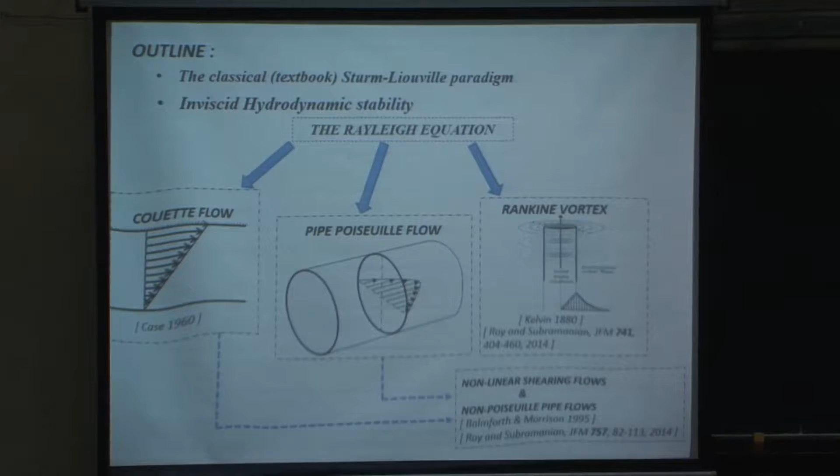What I'll be talking about is inviscid hydrodynamic stability, meaning that the viscosity is negligible, so the Reynolds number is infinity. We'll see that the governing differential equation for the modes of an inviscid fluid is the Rayleigh equation.

After looking at the Rayleigh equation, we will first analyze what the discrete spectrum of the Rayleigh equation is, meaning the modes of the Rayleigh equation that look like the modes of the classical paradigm. Then we will go to what is the continuous spectrum of the Rayleigh equation, because that is more important in some sense.

Because this is a pedagogical lecture, we will actually derive the form of the continuous spectrum in a couple of simple problems. So we look at the simplest case, Couette flow, and then we look at pipe flow, and we look at two-dimensional perturbations, which are simple enough that you can find the continuous spectrum. Then, depending on the time, we will go to problems of greater complexity.

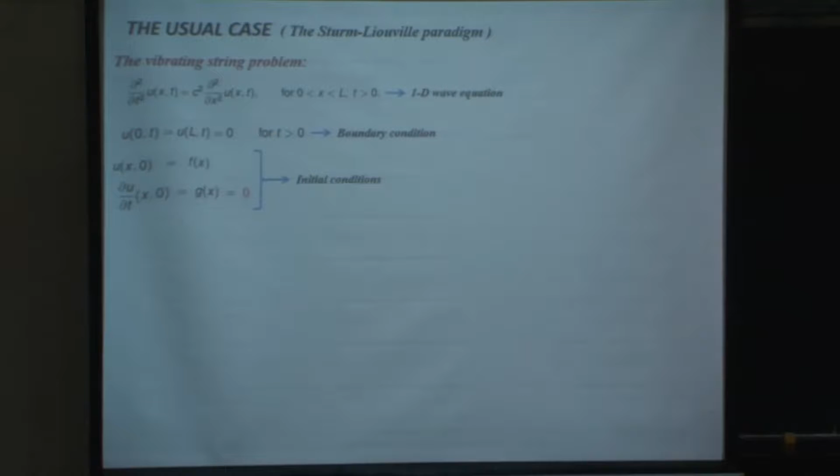Okay, so this is the vibrating string problem. U there is the amplitude of vibration, and U satisfies the wave equation. C is the wave speed, which is related to the tension in the string and its mass per unit length.

Right now what we care about is we have a differential PDE like this, with suitable boundary conditions. These are just fixed end boundary conditions, so the vertical displacement of the string is zero at the ends, fixed at the ends. We have certain initial conditions, which involve both specifying the displacement, how much I pull the string, and the velocity of the string at the initial instant. Knowing this, I have a well-posed problem.

So I'm going to look for normal modes of the vibrating string, meaning characteristic oscillations that preserve their shape even as they oscillate in time. These oscillations, though they are functions of both position x and time t, exhibit a separable dependence on x and t. So we write it as a function of x times a function of t, and this function of t is a complex exponential, denoting an oscillatory function of time. C lambda is the frequency, lambda here is like the wave number.

So if we just substitute this in this equation, we get a simple second order differential equation in x, and we get x to be sinusoids.

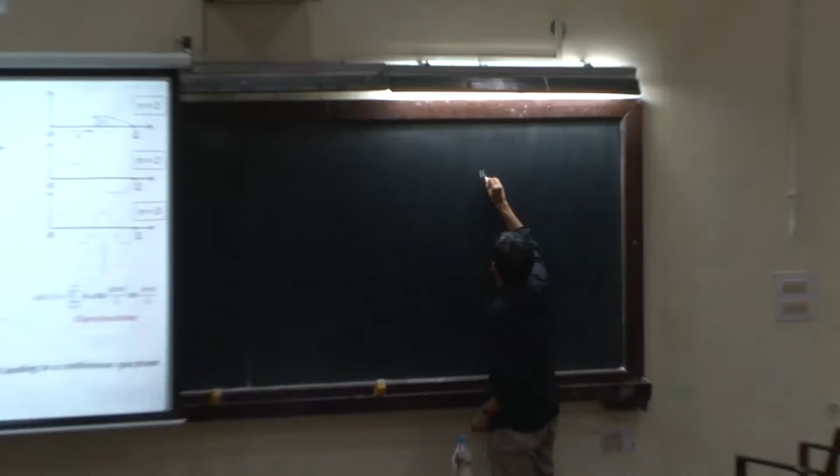Once I know the individual modal amplitudes, what I'm saying is I have an initial amplitude u of x, and I am going to write it in terms of this series. These are the unknowns, but knowing this function, this is just a Fourier sine series, those are the coefficients, so I can immediately invert it in terms of u naught and find out the a_n's.

Once I find all the a_n's for all n, then I know what is the projection of u naught on each of the elementary modes of vibration of the string. Once I know this, then I know the decomposition of the initial amplitude in terms of the elementary modes.

Then it's trivial to get u at any finite time, because all I have to do is oscillate each of these modes at that frequency. I immediately obtain the finite time solution from the initial disturbance.

So this is the advantage of knowing the modes: once you project an arbitrary initial disturbance in terms of the modes, you immediately know the solution for any time, because you know how each mode behaves for all times. So the idea is to try and do this in the context of hydrodynamic stability.

This is what is called a discrete spectrum, because as you can see, the eigenvalues are well separated, and they form a countably infinite set. We'll see that this is usually not the case in hydrodynamic stability.

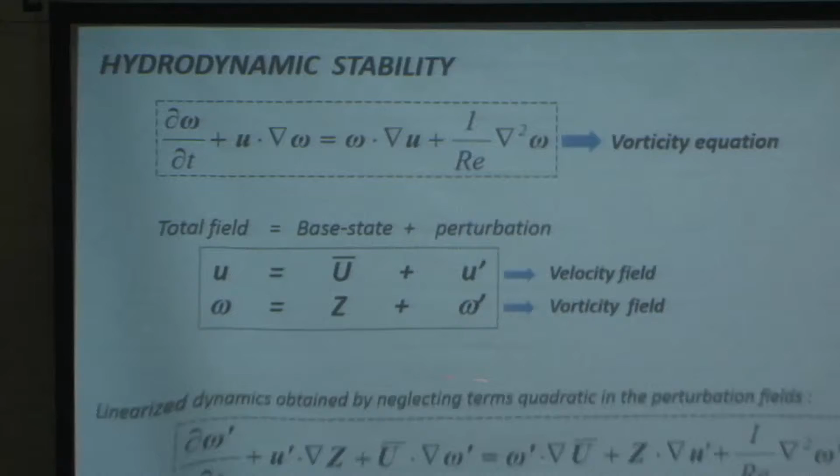Remember, we are dealing with inviscid stability. Inviscid stability corresponds to Reynolds going to infinity, so I will push out that diffusion term and only consider the inviscid vorticity dynamics. So that is the equation that is going to underlie all of what I say today.

Just to identify the different terms: this is the unsteady term, the variation of the perturbation vorticity field with time. This is the convection of the base state vorticity by the perturbation velocity field, and the opposite, convection of perturbation vorticity field by the base state. These are the two vortex stretching terms: the perturbation vorticity is stretched by the base state gradient, and the base state vorticity is stretched by the perturbation gradient.

So we are going to go in this sequence. We'll first consider planar shearing flows, with two examples: Couette flow, where u of y is just y, proportional to a linear profile, and if time permits, we will consider channel flow, where u of y is a quadratic function of y.

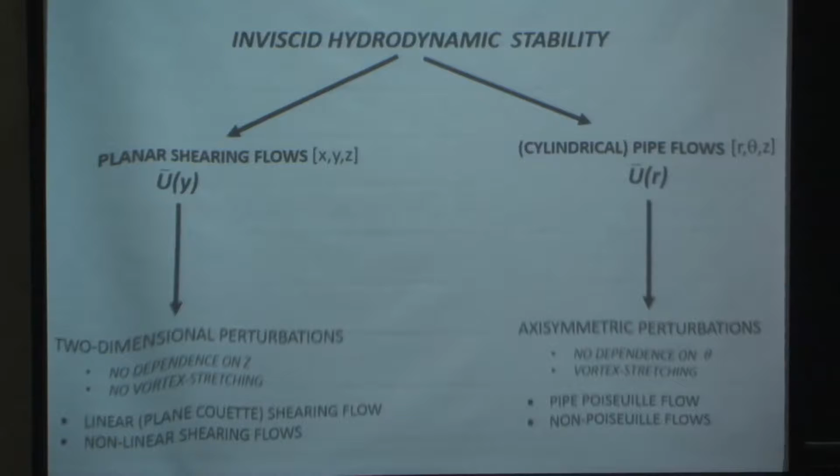We will start with two-dimensional perturbations. The advantage of two-dimensional perturbations is that there is no dependence on the third coordinate z. So x-y is the plane of the flow, u is in the x direction, y is perpendicular to the flow direction, and z is along the base state vorticity direction.

So two dimensions means that there is no dependence on z, and if there is no dependence on z, the vortex stretching terms in the equations I just showed would be identically zero. So it allows for a simpler equation.

But we will also consider pipe flows, and in pipe flows, the analog of two-dimensional perturbations are axisymmetric perturbations. Pipe flow is a cylindrical coordinate system. The flow is in the z direction. It varies as a function of the radial coordinate, and the analog of two-dimensionality is that there is no variation with theta, so it is axisymmetric. But the crucial difference is that while there is no vortex stretching in the planar shearing flow case, there will be vortex stretching here, and that leads to a crucial difference.

So I am going to go in this sequence. I will first consider linear planar shearing flow with two-dimensional perturbations. Then I will go to pipe Poiseuille flow with axisymmetric perturbations, and then come back to consider a nonlinear flow, and then go to non-Poiseuille flows depending on the time constraint. So that is roughly in increasing order of difficulty.

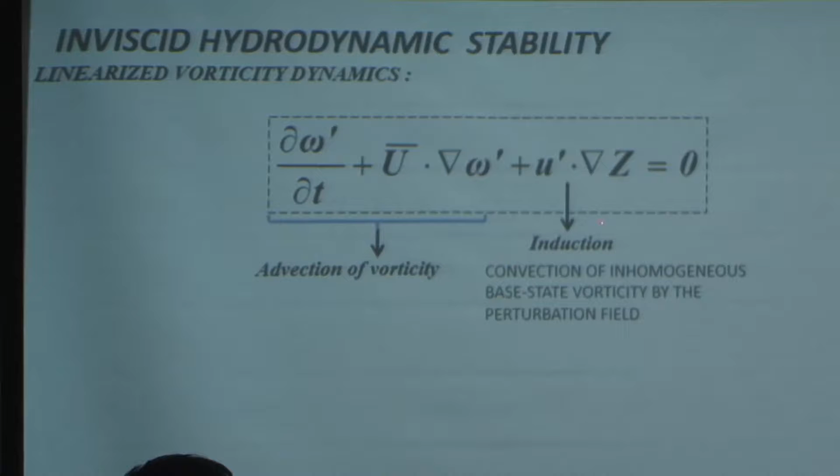So for two-dimensional flows, as I said, there is no vortex stretching, so there is only the unsteady term and the convection of the vorticity. This is the material derivative of the vorticity field, and this term arises because the base state vorticity is not constant. So this is convection of the inhomogeneous base state vorticity field by the perturbation velocity.

So what I do is similar to the string problem: I look for normal modes. Remember, there we again had a complex exponential. So we are going to do the same thing, expand both the vorticity field. The vorticity field now has only one component since it is a two-dimensional perturbation. A two-dimensional flow only has a vorticity pointing out of the plane, so that is the only component of vorticity.

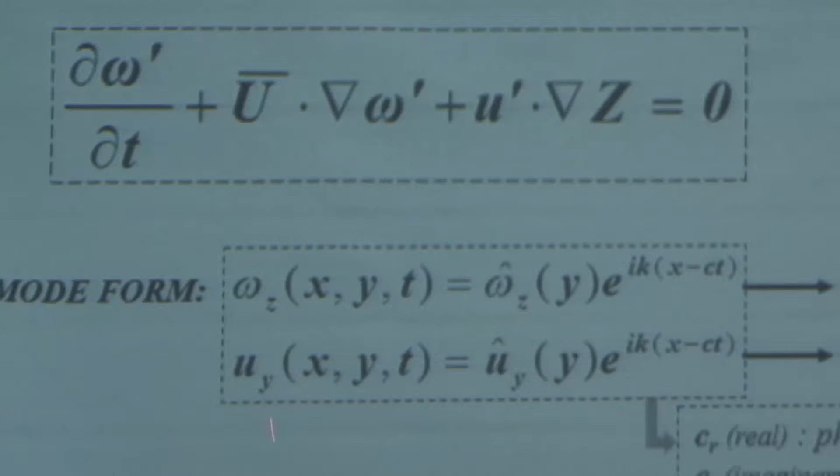So I am going to expand it as a wave. This wave propagates in the x direction with speed c, and the wave number is k, so this dependence on y has to be found. Now similarly, I expand the normal velocity in the perpendicular direction, that is y. There will be a corresponding velocity in the x direction that can be derived from the continuity equation.

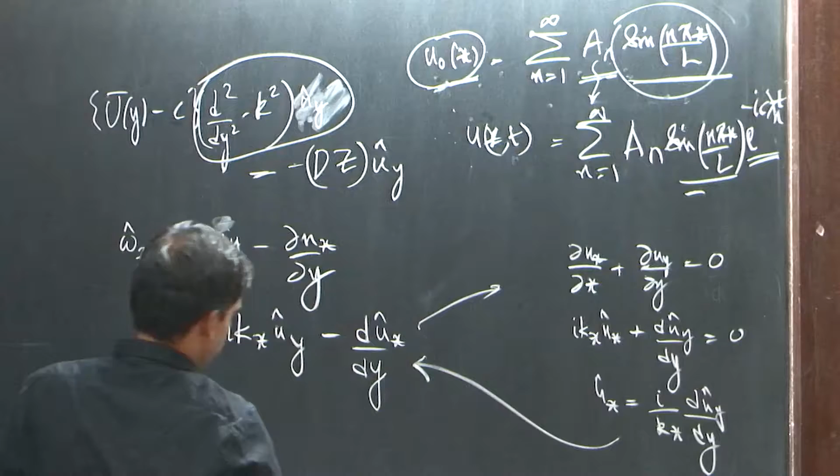So that operator is proportional to the vorticity, and it's easy to see that because you start from the definition of vorticity, and because you have assumed wave-like perturbations, it's going to be proportional to Ikx. Then you use the continuity equation to get Ux, and you substitute it here so that you get Ikx, and you find that omega z is proportional to that quantity.

So there is the perturbation velocity vorticity, that is the wave speed, that constitutes the unsteady term. That's the convection of the base state vorticity by the flow, known as the induction term. Remember, the induction term is the convection of the base state vorticity by the perturbation velocity field, and the base state vorticity is in general not constant. Z is the base state vorticity, and dz is the gradient of the base state vorticity with y. It exists because the normal velocity convects more vorticity into a given region and less vorticity out of it, and that leads to this source term.

So then this is the eigenvalue problem to be solved. The eigenvalue problem is in the normal velocity. We have a second order differential equation here, and we have boundary conditions — we can take the boundaries at y equals 0 and y equals 1, where uy will be 0. So we have to solve this and get the characteristic eigenvalues, which are the values of c. Once we know uy, the vorticity field can always be obtained from this.

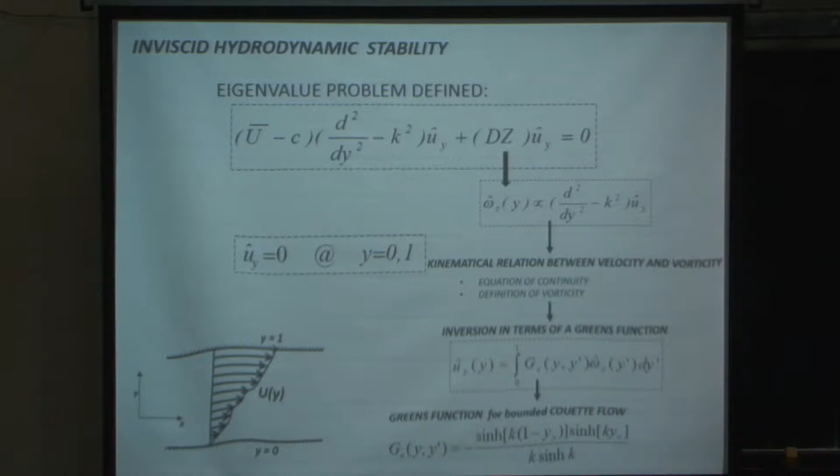Okay, so now first we look at simple cases. The simple cases are where the Rayleigh equation has a discrete spectrum. So we'll first look at the discrete spectrum of the Rayleigh equation and see the difference between the discrete spectrum of the Rayleigh equation and the discrete spectrum for the vibrating string.

So in order to see the discrete spectrum, we will consider the simplest instability problem of a homogeneous incompressible fluid, known as the Kelvin-Helmholtz instability. The instability is that of a vortex sheet. You have a sheet and the vorticity is only non-zero on this sheet, so you can imagine this sheet being threaded by vortex lines. We will analyze the instability of this vortex sheet to perturbations, imagining this sheet to be slightly disturbed and seeing how that disturbance amplitude evolves.

Now the first question to ask is, what does the base state vorticity profile look like? Well, the base state vorticity is only non-zero at this y location. It's zero everywhere else, so the vorticity is actually a delta function.

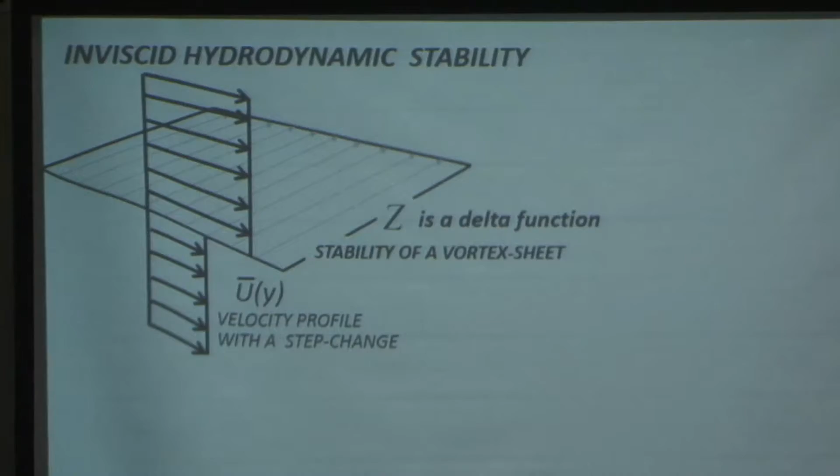What is the velocity that it induces? It induces a discontinuous velocity field with a step jump, and that is because each of these vortex lines wants to induce a circulation like this. If I look at the sheet along that direction, the vortex lines are all pointing towards me. These are the vortex lines making up the infinite sheet, so it goes on to infinity in both directions. Each vortex line induces a circulation like this, okay?

And when you add up all these circulations, you can see that the fluid will be moving in that direction above and in the opposite direction below. So if you add a uniform velocity to this, that will give you a stepped velocity profile. So that's the base state profile that we are analyzing the stability of.

Yeah, I have just reversed it for convenience.

Okay, so now we perturb the vortex sheet and analyze the instability. Now this instability can be easily seen physically.

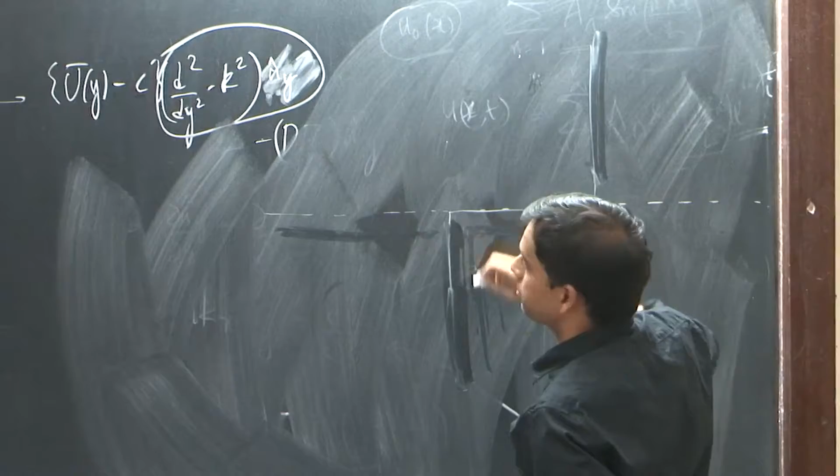So we had the initial plane vortex sheet here, and remember the velocity field it induced was this. I'm just going to take it the other way, because it's like that in the slide, so I'll just reverse it. So this is the base state velocity profile.

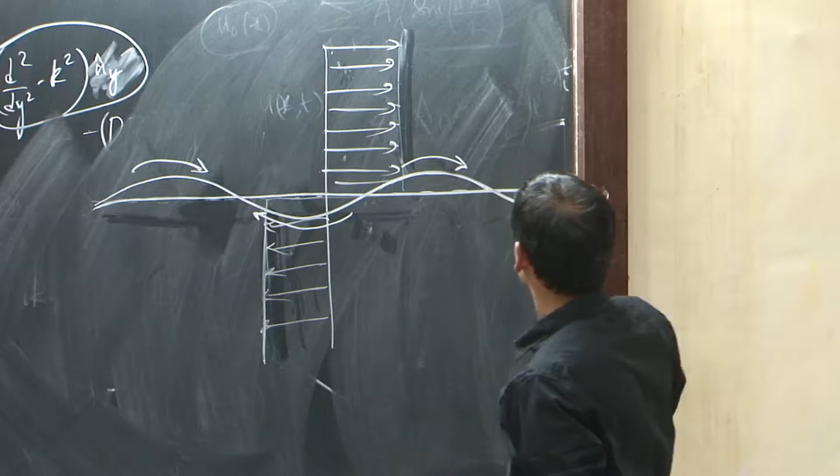This was the original plane vortex sheet, and now I imagine I introduce a modulation, so it becomes a wavy vortex sheet. So now what happens? Well, if I imagine this part of the vortex sheet is now subjected to this flow, whatever parts of the vortex sheet are going to be in the upper half are going to be convected by that flow towards the right.

The deformed parts which are in the lower half are going to be convected towards the left. And now remember, since I changed the sign of the vorticity, the vortex lines are now pointing inward, so I'm going to denote them as crosses. These were the original vortex lines that were threading the vortex sheet. And now I have these crosses moving towards this point, these crosses moving towards this point, so I have an excess cross vorticity there.

And that excess cross vorticity is going to induce a circulation like that. And I'm going to have a deficit cross vorticity here, which is going to lead, because the vorticity is moving away from there, to negative perturbation vorticity. That's going to lead to the opposite circulation.

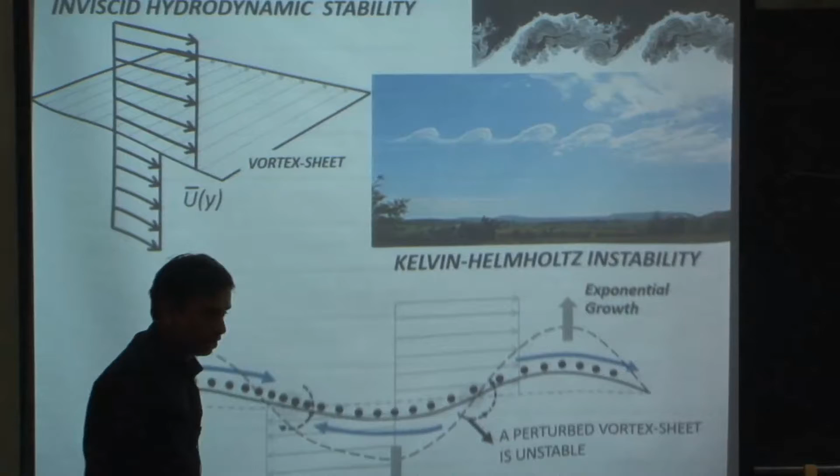So you can see that the induced velocity field due to the deformed vortex sheet pushes this part up, that part down, and again it pushes this part up. So a wavy perturbation tends to amplify. The vorticities tend to concentrate and rarefy at alternate nodes, and that tends to amplify the vortex sheet. So this is really what's known as the Kelvin-Helmholtz instability.

So there I've shown the vortex sheet amplifying with time. Now if you ask what is the growth rate of this vortex sheet, let's go back to the form of the normal modes. So C when real is a wave speed, and the imaginary part of C is the growth rate.

So now if we ask what rate does the vortex sheet grow, you can see that the velocity field induced is symmetric. So we expect the vortex sheet to remain stationary but grow. So the wave speed is zero and there will be a growth rate, so C will be purely imaginary. Now C has units of a velocity.

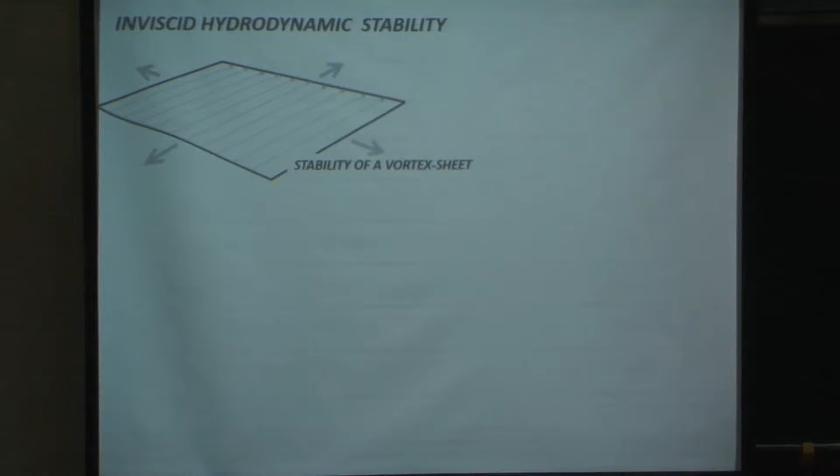Dimensionally, if we look at what physical parameters we can use to form C, there is no length scale in the problem. The vortex sheet has zero thickness, so the only parameter is the velocity of the base state. Therefore Ci has to be proportional to u. It turns out the constant of proportionality is half, but even without that, you could say Ci must be u, because there's simply no other dimensional quantity to make a dimensionless function.

Now if Ci is u, then the actual growth rate is u times k, where k is the wave number, the inverse of the wavelength. This tells you that the growth rate becomes stronger and stronger as the perturbations have smaller and smaller wavelength.

That's because the growth occurs due to convection of vorticity over a distance of a wavelength. With a smaller wavelength, it takes a shorter time for the flow to convect and for the vortex sheet to grow. So in this approximation, the smallest wavelengths grow most rapidly. If I plot Ci versus k, the wave number, this is a plot of the dispersion relation.

Then I have the growing mode, which is just half u. Growing and decaying modes in the Rayleigh equation always occur in pairs, so for every growing mode there will be a decaying mode, at minus half. Remember, they are independent of k, so they are just horizontal lines.

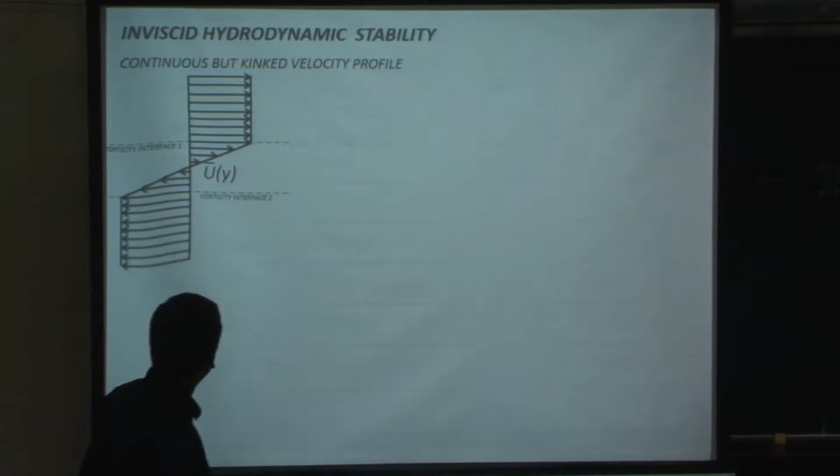Now we'll smoothen the velocity field a little bit. We had a jump in the velocity field, now we'll make it continuous. Originally our vorticity field was a delta function; now the vorticity is zero here because the velocity is constant, and constant there too. So we've regularized it from a delta function to a step function. The vorticity field corresponding to this velocity profile looks like a plateau of vorticity in a region of height h.

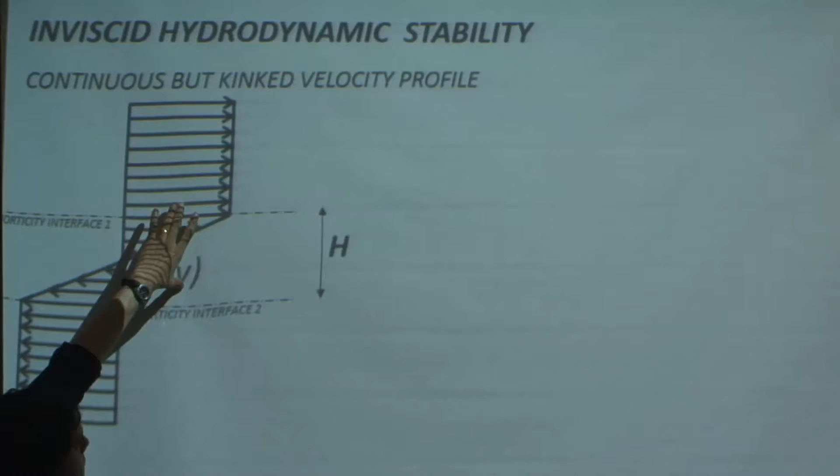The important thing we've attained by regularizing this velocity field is that we've introduced a length scale into the problem, the length scale over which the velocity varies from u to minus u. You can already see that for sufficiently large wavelength perturbations, much larger than h, this length scale is negligible, and things will reduce to the earlier problem. For large wavelength perturbations, corresponding to very small k, we still have the original problem, but here we have a non-trivial relation.

Going back a couple of slides, earlier we could say Ci is proportional to u because there weren't enough parameters to form another dimensionless function. But now that we've introduced a length scale h, k times h is a dimensionless wave number, so f of kh is a dimensionless function. Since u has the dimensions of velocity, C must be proportional to u times this dimensionless function, which we get only by solving the Rayleigh equation. We expect, because long wavelength perturbations much greater than h would still behave the same way, that f of kh approaches half when kh goes to zero.

Now we won't solve this in detail because it's easy to see what happens. You have to imagine a non-zero vorticity portion here, with zero vorticity on either side. So we can regard the base state velocity profile as consisting of two vorticity interfaces: the first between a region of non-zero vorticity and a region of zero vorticity, and the second between non-zero and zero vorticity regions again. This means there are now two degrees of freedom, whereas earlier we had just one, the vortex sheet. Now there are two interfaces that can in principle behave independently.

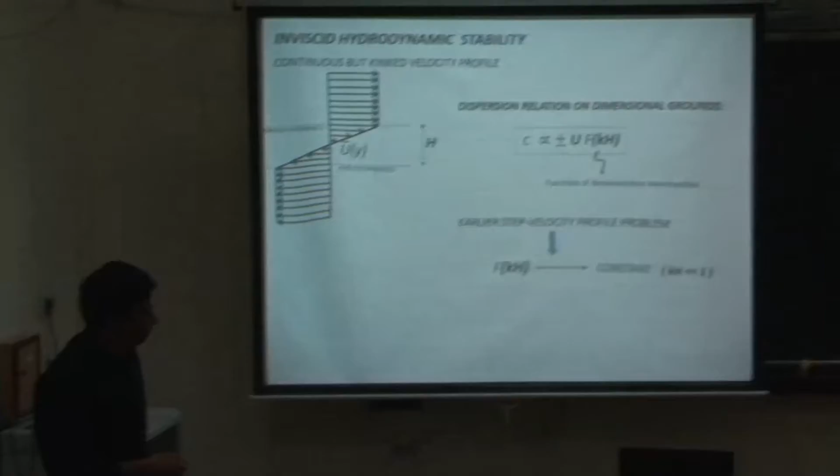So what we could do first is consider just one of these vorticity interfaces. What happens if I perturb one of them? This is what it looks like, a perturbed vorticity interface. The signs here denote the signs of the perturbation vorticity. How do I get the signs? Remember, the vorticity here is negative.

So this is a negative vorticity region. Whenever the interface dips into the negative vorticity region, it brings in zero vorticity, creating a positive perturbation vorticity that's greater than the original negative value. Conversely, if the interface moves above, it introduces negative vorticity from this region on top of the interface, giving negative perturbation vorticity, then positive, negative, positive, and so on.

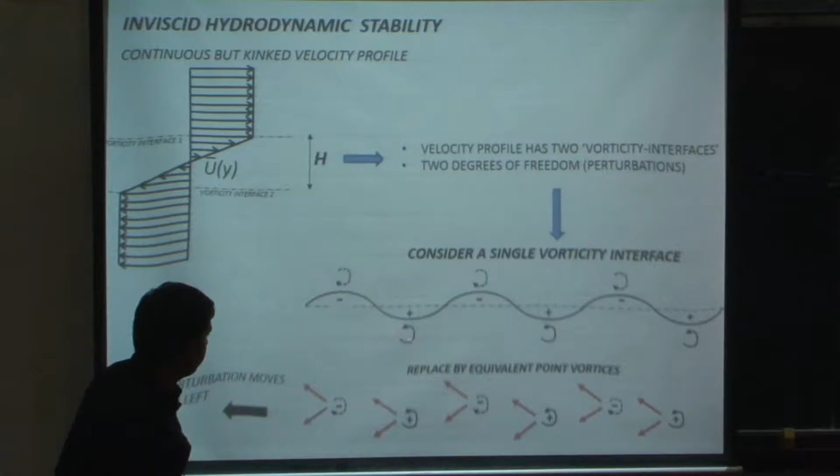Now that I've marked the signs of these vortices, I can simplistically imagine each as an isolated point vortex. Negative vorticity implies clockwise circulation, positive implies anti-clockwise. So I can replace this by the sense of their circulation, inducing clockwise, anti-clockwise, clockwise, anti-clockwise patterns.

Each vortex will convect with the sum of the velocities induced by all the other vortices. Let me draw this: negative, positive. Looking at the velocity induced by this vortex, its circulatory motion will push it in this direction. The circulatory motion due to the next vortex will push it in that direction. Similarly, this will push it by a smaller amount in this direction, and that will push it in this direction.

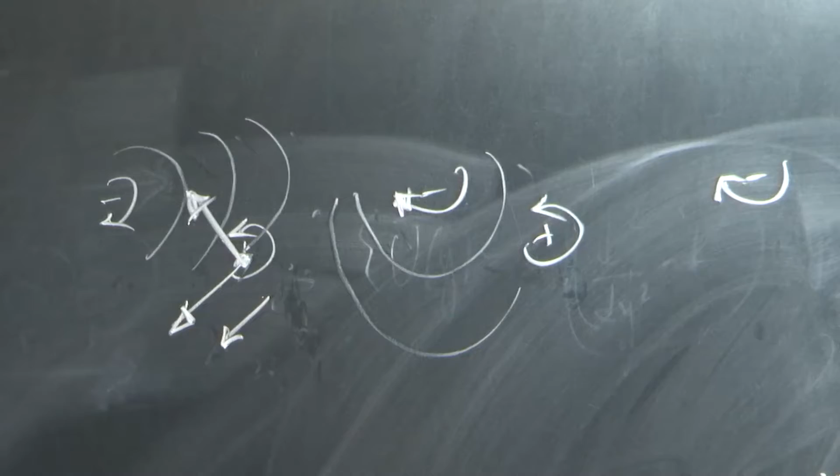You can see that the alternating signs are convecting it such that the convection in the vertical direction cancels, but there's a net convection in the horizontal direction. Therefore, that system of point vortices will actually move towards the left, which tells you that perturbed vorticity interface, if it were by itself, will move towards the left. By the same argument, the other vorticity interface will move towards the right.

So what does this tell us? We can consider the limit where those vorticity interfaces do not interact with each other, and that limit is where kh is much greater than 1. What does that limit mean? This means k is much larger than 1 over h, so that the wavelength of that perturbation is much smaller than the distance between the two interfaces.

The influence of this waviness extends to a distance of order one wavelength. This wavy perturbation induces a velocity field that decays over a distance of order one wavelength, and if the distance between the two interfaces is much greater than a wavelength, the two interfaces don't see each other—they behave independently, and each one is a neutrally stable mode. One propagates towards the left, the other towards the right. So we have two neutral propagating modes when kh is much greater than 1.

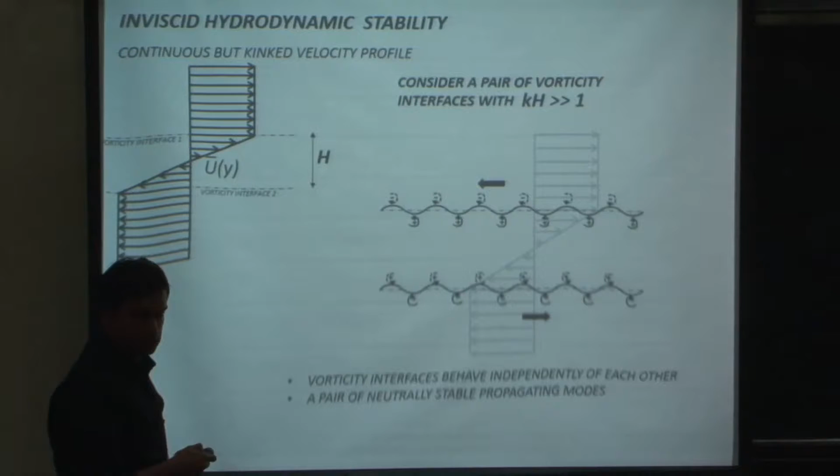But there are two things that happen when kh starts decreasing. One is that these interfaces actually propagate slower. The other thing, which you would have guessed, is that their range of influence extends. As they become longer wavelength, their velocity field influence increases, and the two vorticity interfaces become increasingly coupled.

At a certain point, they become coupled strongly enough that there's a resonant interaction between these two vorticity interfaces, and that's when the growth begins. So there will be a critical value of kh, an order-1 dimensionless number, below which longer wavelength vorticity interface perturbations will grow exponentially. And when the wavelength becomes very, very long, it reduces to our earlier Kelvin-Helmholtz problem.

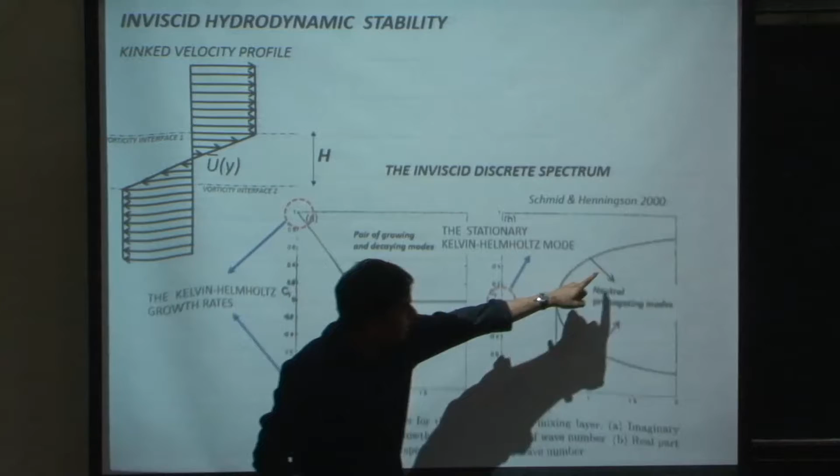If you look at the spectrum, it looks this way. Here I have two things: the imaginary part of c, which is the growth rate, and the real part of c, which is the wave speed, both plotted against kh. At very large kh, the growth rate is identically zero—remember, these were neutrally propagating modes. We have a pair of wave speeds, one propagating towards the left, the other towards the right.

As kh decreases, they become strongly coupled and propagate at the same speed, which by symmetry is zero, because the velocity profile points towards the right and towards the left with the same magnitude. Below a certain kh, it's zero, and the growth rate takes off, asymptoting to a finite value as the wavelength becomes infinite.

So in the limit kh goes to 0, you have a very long wavelength instability, which is in fact the same growth rate that we found in the first problem. That growth rate is plus or minus u by 2 — the Kelvin-Helmholtz growth rate.

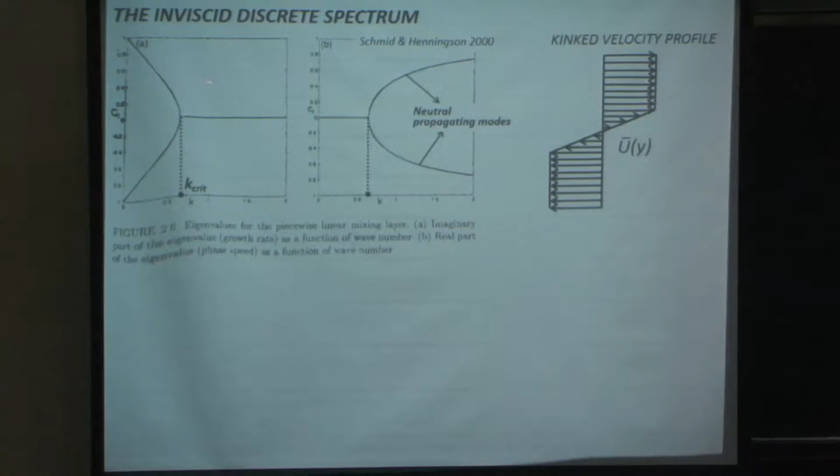Okay, one more step. So this is the spectrum. Our velocity profile is still artificial in that it has a kink there — a jump in slope. So for this kinked velocity profile, we just saw the spectrum.

Long wavelength growth rate and short wavelength neutral propagating modes. Now the question is, what happens when I smooth out these kinks, converting them into regions of sharp curvature? It turns out I retain the growing and decaying modes, but the neutrally propagating mode disappears. So the spectrum for a perfectly smooth velocity profile looks like that.

This is important because the spectrum tells us that beyond this critical wave number, there are no modes. And below that critical wave number, there is a pair of modes. Those modes have to do with the maximum in vorticity.

Remember, this piecewise linear velocity profile corresponds to a step function in the vorticity. If I smoothen that velocity profile, it leads to a Gaussian-like profile in the vorticity — a smooth maximum in the vorticity.

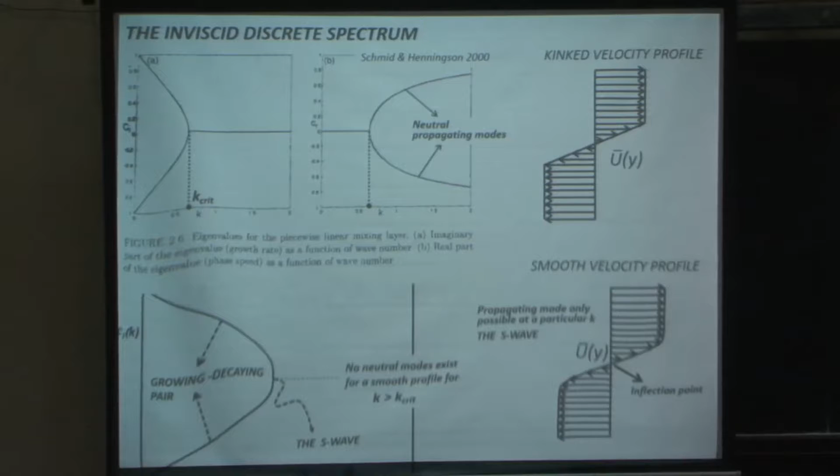So the two modes we are seeing here, the growing and decaying, are associated with that vorticity maximum. And the vorticity maximum leads to an inflection point in the velocity profile. So you need an inflection point corresponding to a vorticity maximum in order to see an instability. But the important thing is that, again, beyond a critical wave number, or below a certain wavelength, there are no modes.

So in general, the discrete spectrum of the Rayleigh equation looks like this. If we have a velocity profile with multiple inflection points, corresponding to each inflection point there arises a pair of modes as the wave number decreases, as we go to longer and longer wavelengths. But there will always be an infinite wave number range over which there are simply no modes.

So here, for instance, depending on the wave number I look at — if I look at this particular wave number, there are two discrete modes. If I look at this wave number, there are 1, 2, 3, 4 discrete modes. Of course, at wave number 0, this is for a velocity profile with inflection points.

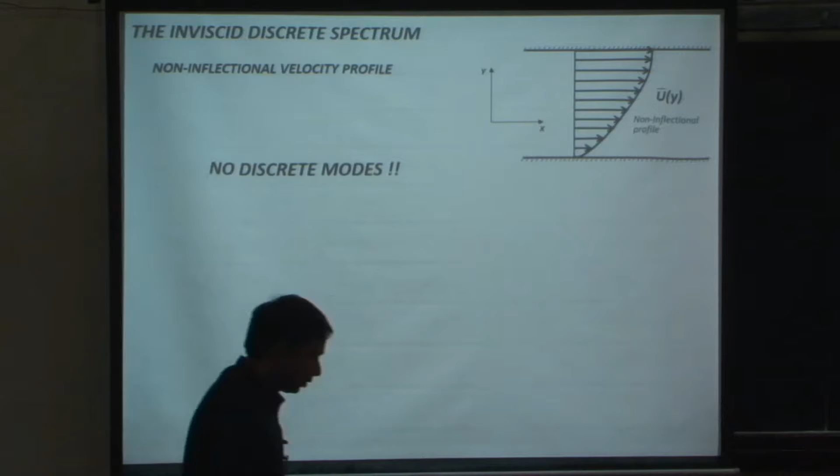If I have a non-inflectional velocity profile — channel flow, Poiseuille flow being an example — there are no discrete modes. And so there are profound differences from the case of the vibrating string.

So this is just summarizing it. For an inflectional velocity profile, we have a finite number of discrete modes which generally occur in pairs. For a non-inflectional velocity profile, there are no discrete modes. Now remember, for the vibrating string, we had an infinite number of discrete modes, and of course you need an infinite number to reproduce an arbitrary initial condition.

So the question here is, if we only have a finite number or none at all, if we start with a particular initial condition, how do we evolve it? What are the basis modes, or fundamental oscillations, fundamental vorticity fields, for this inviscid fluid? That's the problem.

So it turns out, in an obvious manner because they are finite or zero, that the discrete spectrum of the Rayleigh equation is incomplete, and therefore you need something called the continuous spectrum. The continuous spectrum, by its nature, tells you that the eigenvalues are not well separated — they form a continuous interval. All points in a continuous interval are all eigenvalues. And we will see examples of that.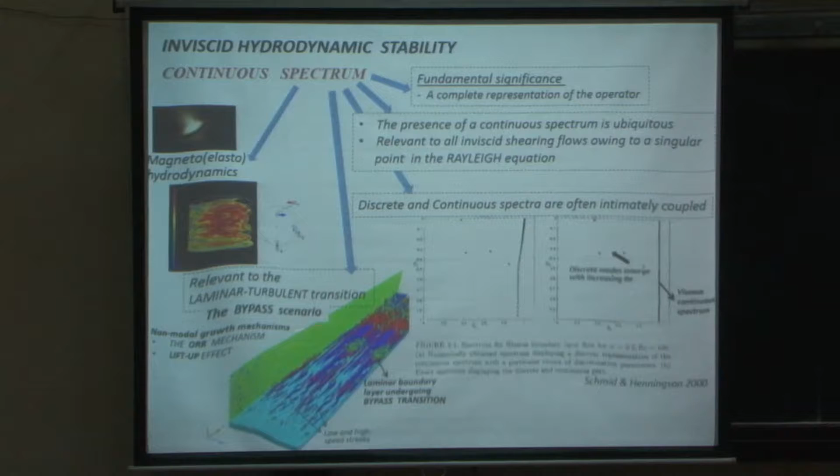It's also relevant to the laminar turbulent transition. There is a so-called bypass scenario where you have a free stream with sufficiently large disturbances. For a free stream with sufficiently high level of disturbance, the transition to turbulence doesn't occur via the conventional linear stability scenario, which involves a Tollmien-Schlichting instability. It occurs via a so-called bypass scenario, which involves the continuous spectrum eigenfunctions.

This is from the Orr-Sommerfeld equation. Yeah, so that is the viscous continuous spectrum.

So a more mundane reason for worrying about the continuous spectrum is that if you use a spectral code, an inviscid spectral code, and solve for any velocity profile, the spectral code spits out all the eigenvalues, and you get patterns like this. This is courtesy of Schmid and Henningson's work. And so the theoretical spectrum looks like this straight line.

Ci here is the imaginary part of the growth rate. You can see that Ci is identically 0. So the actual spectrum is neutrally stable. It's a neutrally stable continuous spectrum.

But because there is a continuous spectrum and the eigenfunctions, as we'll see, are very irregular, the numerics usually isn't able to resolve it. So it gives you spurious growing and decaying modes. In order to understand the structure of these growing and decaying modes, to know that they are spurious and related to an underlying continuous spectrum, you need to really understand the structure of the continuous spectrum to be able to interpret the results of a spectral code.

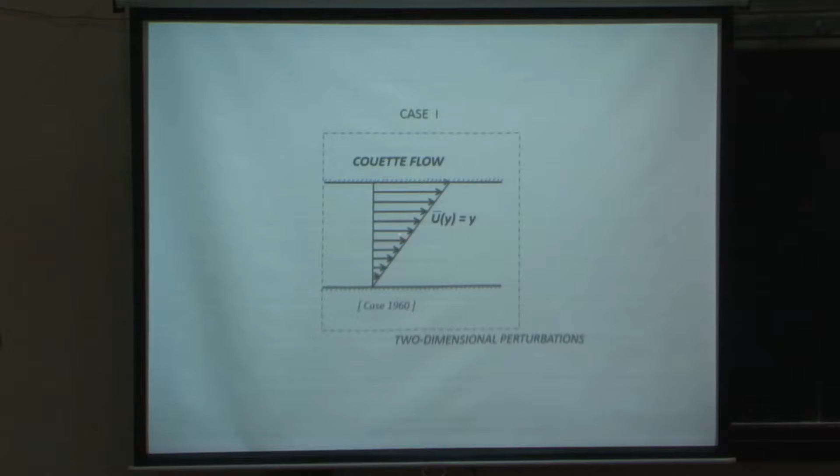So now we come to the simplest case of the continuous spectrum. We'll consider just plain Couette flow, where u is just proportional to y. We have a linear velocity field, and we'll consider two-dimensional perturbations. In this case, remember, there is no inflection point.

So there are no discrete modes in Couette flow. The spectrum is purely continuous. So we'll try to get that continuous spectrum. And what we'll next do is: obtaining the continuous spectrum will allow us to represent an arbitrary initial condition in terms of the continuous spectrum eigenfunctions, and therefore to see the evolution of that initial condition with time. So that's what we'll do.

So in this case, the Rayleigh equation is very simple. Remember, there was an additional term here proportional to u double prime. I think I rubbed it off, but the original Rayleigh equation looked like this. u double prime is of course identically 0 for Couette flow, and therefore we have a simple second order differential operator here.

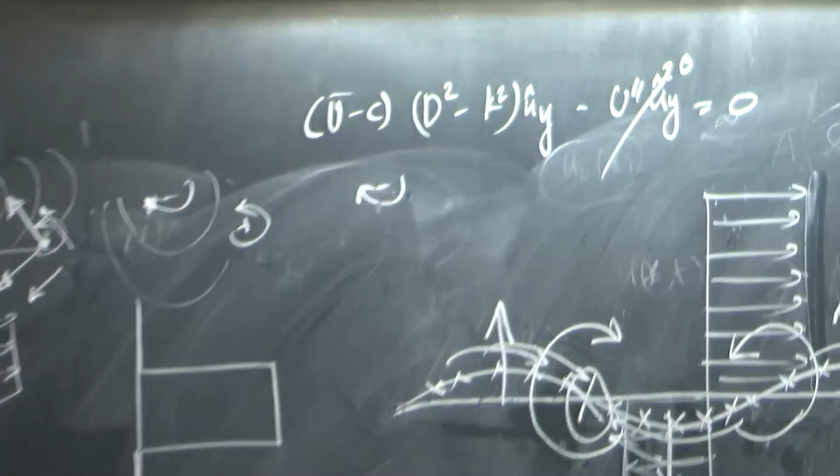We have the usual impenetrability boundary condition. Remember, it's inviscid, so I can only set the normal velocity to 0. I don't have the no-slip boundary condition. This is simple to solve.

If I equate this operator to 0, I get uy as just a combination of exponentials. And if I try to satisfy the boundary condition at y equals 0, I'll have a negative sign. So C1 must be minus C2. And so satisfying one boundary condition will tell me that uy is...

It's proportional to sinh, so that when y is 0, uy is 0. But when y is 1, sinh of k is not 0. And there is no combination of those constants that can make that 0, which is another way of saying that there are no discrete modes in this flow.

And this is not only true for Couette flow, it's true for any profile that doesn't contain an inflection point. So now what do we do? Where do we get the missing modes from?

To see that, we will again note that, remember, the spanwise vorticity was related to this second order operator acting on the normal velocity field. So if I look at the equation, this is really u minus c times omega z equals 0. And u is just y, so I'm going to write y minus c times omega z equals 0.

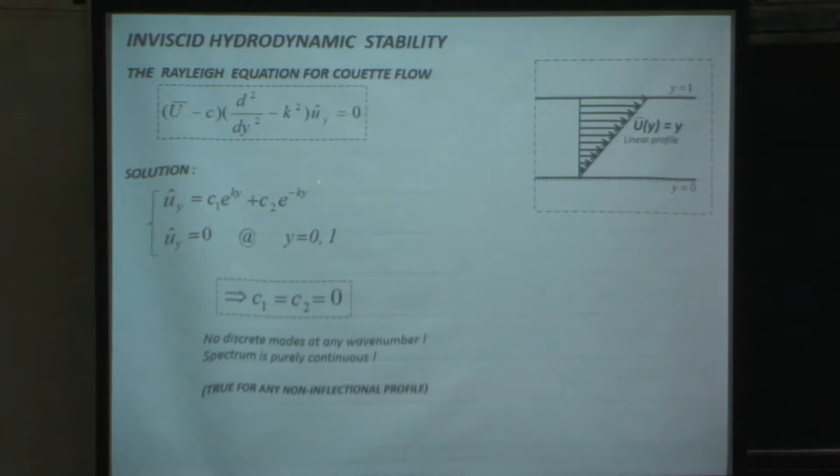Now there are two possibilities here. The first one, which is obvious, is that omega z is itself 0 — which is what I did here. I equated this operator alone to 0 and then landed up with no modes. So this option tells me that there are no discrete spectrum modes.

But there is another solution to this equation, and that is that omega z must be a delta function. This relies on the identity that x times delta of x, where delta is the Dirac delta function, is actually 0.

So if you have an equation like x to the power n times f of x equals zero, then f of x is actually a1 delta of x plus so on, up to an delta of the n minus 1th derivative of x. So the general solution of that equation is the linear combination of the delta function up to the n minus 1th derivative. In this case we have n being 1, so f of x can just be delta of x.

Now what does delta of x mean? Well, we saw it in the first problem. Remember, in the Kelvin-Helmholtz problem, the base state vorticity was a delta function. That was the vortex sheet. So here we are finding that the perturbation vorticity is a delta function, which means that the perturbation vorticity eigenfunctions must be vortex sheets.

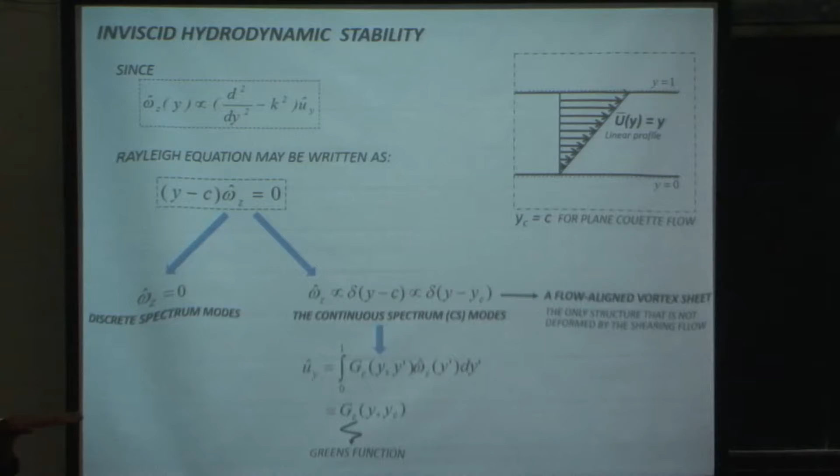There is a difference, of course, in that the vortex sheet in the Kelvin-Helmholtz instability had a constant strength everywhere. But this is a wave-like perturbation, so the strength of the vortex sheet must oscillate along the flow direction. Let's just draw the vortex sheets in the two cases.

So that was the base state vortex sheet which we started out from. This has everywhere the vortex lines with the same sense of rotation. This doesn't vary in x, remember this is the x direction. But now I have a vortex sheet.

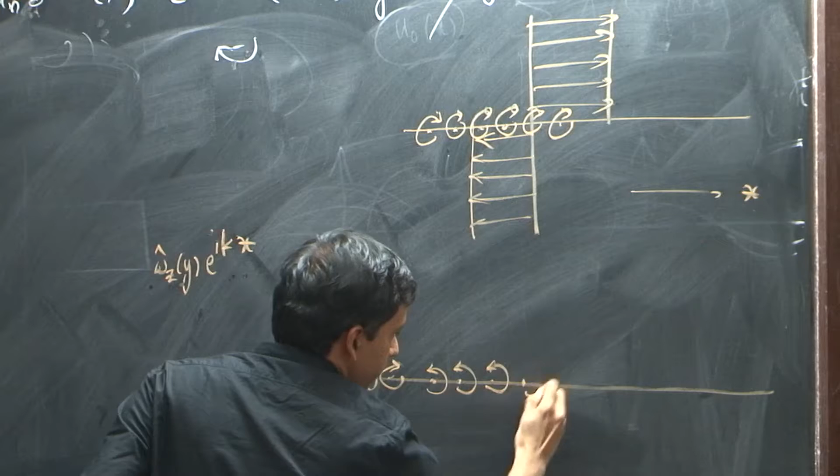Remember that the perturbation vorticity field is omega z of y times e raised to ikx, which means that the strength of the vorticity will change sign after every wavelength. So I'll have vortex lines here acting to turn it this way. If I go one wavelength away, they'll act to turn it the opposite way, and then again turn it that way. So I must have a discontinuity like that here, like this here, and then again like that here.

But of course I can't have these flows coming in like that. They have to go up, and these flows have to come down. So I can generate a pattern. The pattern, what it looks like, is this way.

So locally there is still a jump in the tangential velocity. The tangential velocity jump changes sign every wavelength, this is 2 pi by k. Unlike before, where the tangential velocity jump remains independent of x. So this is the sort of structure I'm looking at, a vortex sheet with an alternating plus sign and minus sign for the perturbation vorticity.

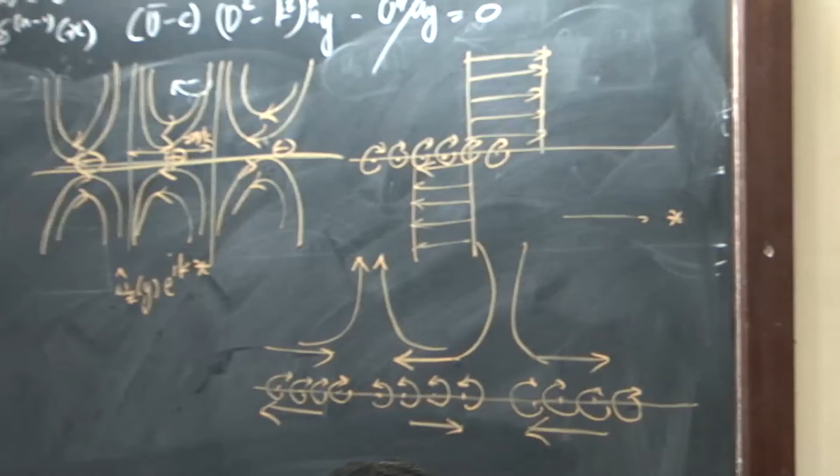It is valid. No, it will be inclined. In this case the wave vector is in the plane of the board, and the vorticity points perpendicular to the board. So if you have three-dimensional perturbations, the wave vector will be inclined, and the vorticity will point perpendicular to the wave vector. So this vortex sheet will be turned through an angle, but it will still be there.

The non-modal analysis is essentially a superposition of continuous spectrum modes. So I don't know what your question is, so when you say non-modal analysis, what are you thinking of?

Well, I will show you that every initial condition can be expressed as a superposition of these modes. So any initial condition can be evolved in terms of these modes, including those that lead to transient growth, if that's what you're worrying about.

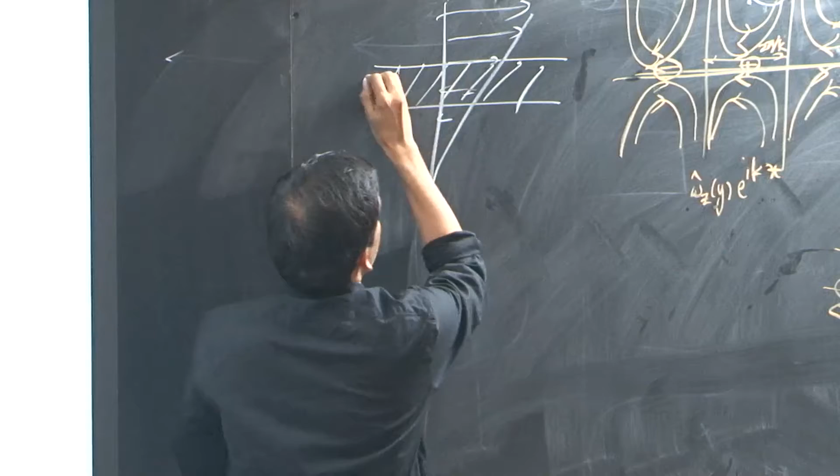Okay, now if you have a vorticity that has a finite spread, let's say it was not a vortex sheet but a vortex band in Couette flow, then this band structure won't be preserved because the upper part of the band will be convected faster than the lower part, and very soon it will be heavily distorted. It cannot be a normal mode.

So the only structure that can be a normal mode is one that isn't differentially sheared by the Couette flow. For that structure not to be differentially sheared, it has to have zero thickness, and the zero thickness vorticity structure is a vortex sheet. So therefore, only vortex sheets satisfy the criterion of a normal mode. In that sense, it's not that difficult to guess that the eigenfunctions would be a vortex sheet. So mathematically, those eigenfunctions are delta functions.

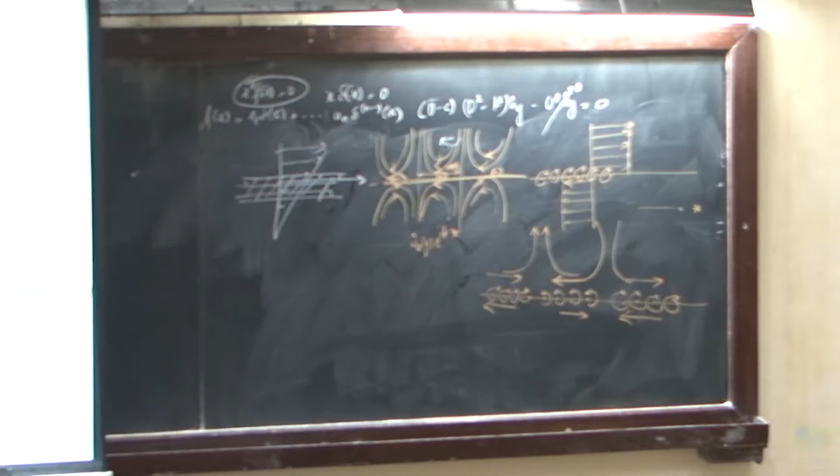And the important thing is, where is the vortex sheet located? The vortex sheet can be located anywhere in the domain. If it is located at this y, it's going to propagate with that velocity. If it's located at this other point, it's going to propagate with this lower velocity. But I can have these eigenmodes located at every possible y in the interior of the domain, and those possible values of y are exactly the continuous spectrum.

So if I ask how fast the vortex sheet will propagate, remember we are talking about the term e raised to i k c t. C is exactly the velocity of the base state at the location of the vortex sheet. So the vortex sheet is located at y equals yc, so c is u at yc. And what are the values of yc? Well, yc can vary from 0 to 1, which means c takes on a continuous range of values from 0 to 1. The continuous spectrum of Couette flow is the interval of base state velocities which runs from 0 to 1.

So knowing the vorticity, you can always calculate the normal velocity, because again they are related by a second order differential operator. So if the vorticity is a delta function, I need to find the Green's function for this operator in order to find the normal velocity, and that Green's function is very readily found. I think I had the expression earlier. Okay, so for this operator, we'll just go back a little.

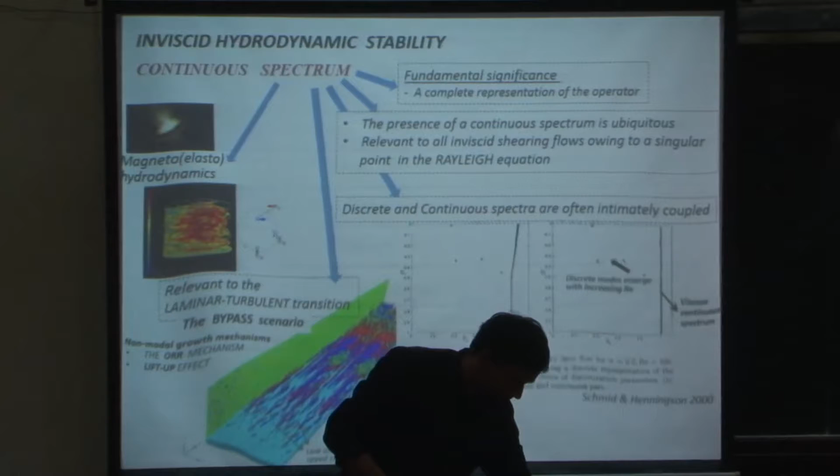Okay, so we have found the vortex sheet. Now one thing it allows us to do is to evolve an arbitrary initial condition. So maybe I will go there first.

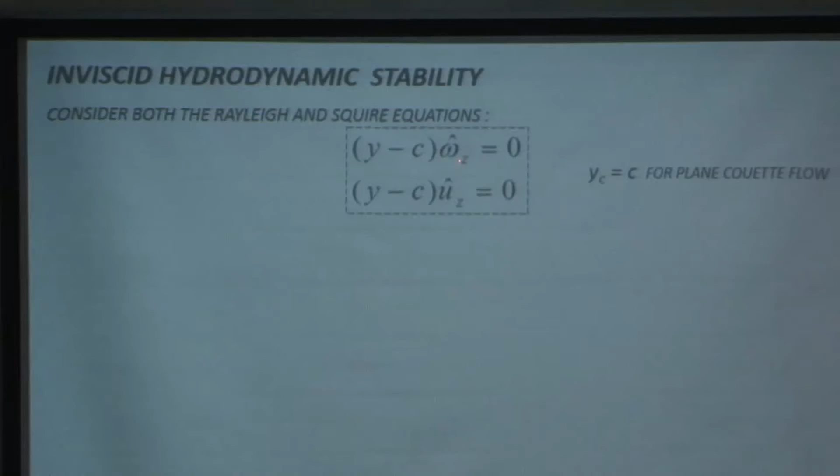So before doing that, remember I considered only the axial vorticity equation, and we just concluded that the axial vorticity was a delta function. Now the axial vorticity corresponds to two components of the velocity field, ux and uy. Within the two-dimensional paradigm, I can also have a uz. The only constraint is that uz must not vary with z. It can point in the z direction, but it mustn't vary along the z coordinate because I have the constraint of 2 dimensions. Now, if you write down the equation for uz, it turns out to be exactly the same as the equation for omega z. So with the inclusion of the third component of the velocity field, I have 2 equations, and I have therefore a second family of eigenfunctions.

The first family is what we already saw: omega z was a delta function, uy is therefore the Green's function, I can derive ux, and uz is identically 0 because this omega z induces a 2-dimensional field. Now the second family of eigenfunctions is related to the second equation. Here uz must be a delta function because it satisfies the same equation as omega z, and uy and ux are both 0. So there is only one component of velocity field that is non-zero, and that is a delta function.

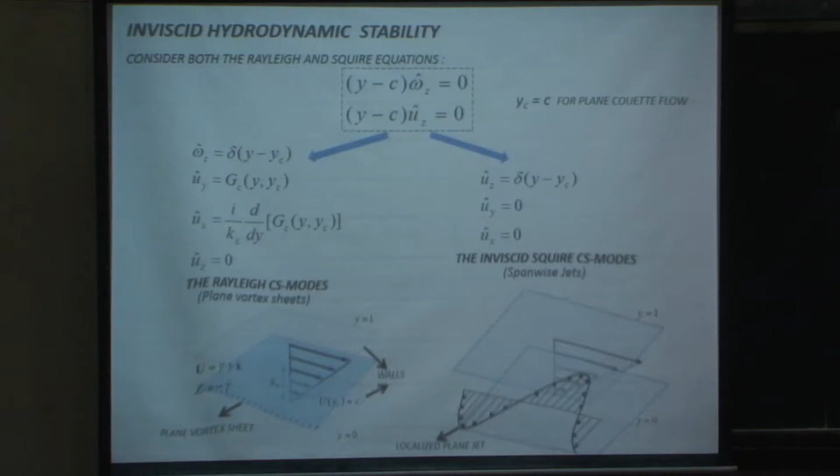So this looks like a jet - it is a very sharply peaked velocity field at yc. This is the vortex sheet modes. Here I am showing a vortex sheet at a particular location between the two boundaries, and this would be a sinusoidally oscillating jet. That is the z direction, that is x, and the vertical one is y. So this is a jet along the third direction, but it has to vary sinusoidally along the flow direction.

So we have 2 kinds of eigenfunctions. Both are singular because both are delta functions. In one case, the vorticity is the delta function, in the other case the velocity is the delta function. Now, this is the reason why the spectral method faces problems, because the continuous spectrum eigenfunctions are highly singular, and it is not possible to resolve them using any finite number of Chebyshev polynomials, for instance, and therefore the spectrum exhibits this ballooning.

Now we have 2 families of modes. The question is, are they enough? Well, they are enough because you need only 2 components of velocity to be represented. The third component of velocity can be obtained from the continuity equation. So you have only 2 independent degrees of freedom in an incompressible fluid, and therefore we can use these modes to represent an arbitrary initial condition. We will do that.

So here is an arbitrary initial velocity field. u naught has x, y and z components. Remember, it is 2-dimensional perturbations, so they are not functions of z, they are only functions of x and y. And then I write them, each of them, as a Fourier integral in terms of their Fourier transforms. So x here becomes k, I have that Fourier exponential, and these are all the Fourier amplitudes of the 3 velocity components - the x amplitude, y amplitude and the z amplitude.

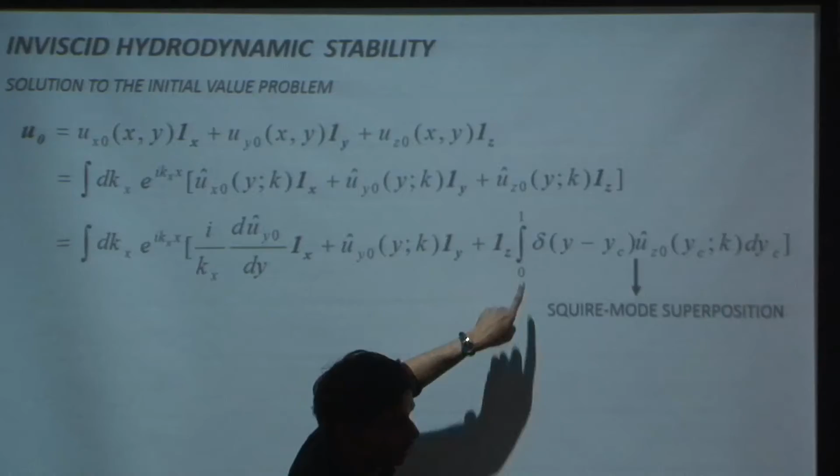Remember, these are delta functions along the z direction. It is a vector delta function pointed in the z direction. So it is really this eigenmode that I am talking about - this was the z component represented by a delta function. So these are the second family of eigenmodes, and I have written the z velocity as a superposition over those eigenmodes.

You can imagine that this superposition is an integral because I have a continuous spectrum. So normally you would write the superposition as f of y is sigma n Cn phi n, where phi n are the discrete spectrum eigenfunctions, Cn are the constants. Here, instead of a discrete index, I have a continuous index which is yc, and I have C of yc times phi of yc. So yc acts as a label for phi, just like n acts as a label for phi in the discrete spectrum case. In this case, phi of yc is just the delta function.

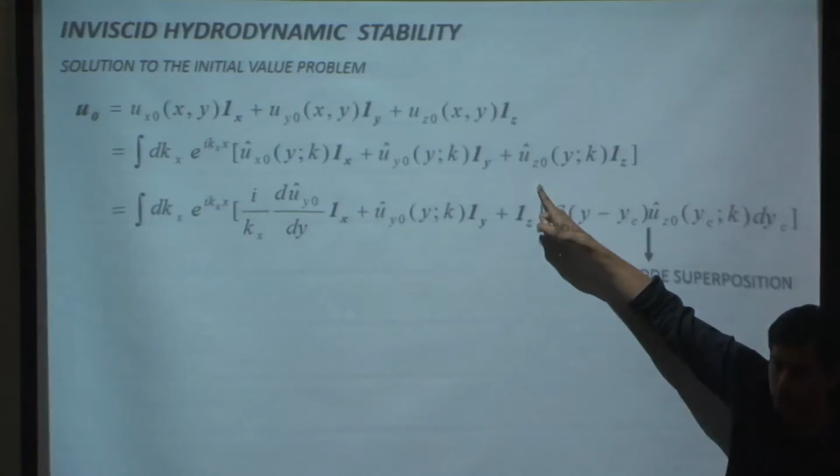So what I have achieved in writing this trivial mathematical identity is I have written the z component of the velocity field as a superposition over the second family of eigenfunctions. This is written as a superposition of jets. So that's one of the three components written as a superposition of the CS modes, the continuous spectrum modes.

Two components remain, but remember I have the continuity equation, so I can use the continuity equation to write ux in terms of uy. So I only have to worry about uy now - the initial uy, that uy naught is the initial velocity field.

So now I can write uy naught in terms of a Green's function integral of the initial vorticity field. There is only one component of vorticity field, and the normal velocity field is the Green's function convoluted with that vorticity field. So here one part of my initial condition is written as a superposition of jet modes. The second part - I am going there because now I have expressed the second part of the initial condition in terms of the initial axial vorticity field. And if you recall, the eigenfunctions that I have to use are axial vorticity eigenfunctions.

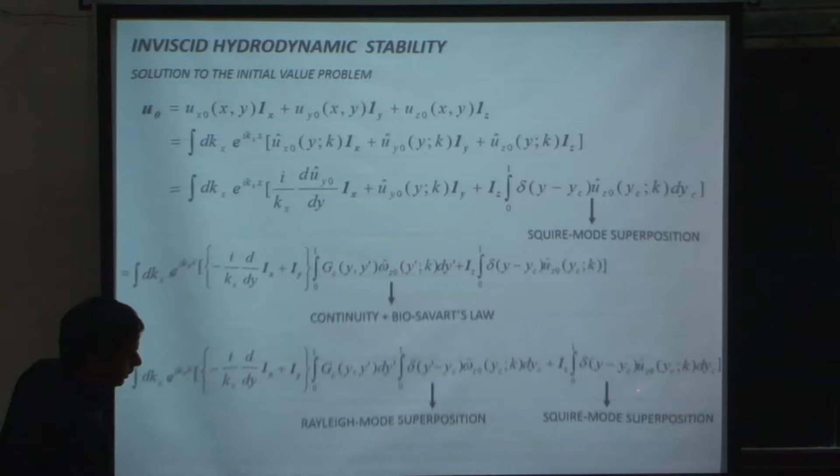So now I am going to use the same identity. I am going to write omega z of y prime as delta of y prime minus yc times omega z naught of yc. These are the axial vorticity eigenfunctions, the amplitude of the eigenfunctions. I have expressed my initial condition as a superposition over the axial vorticity eigenfunctions, which are delta functions in omega z, and over the jet modes, which are delta functions in uz. So this is an arbitrary three-dimensional velocity field, independent of z, expressed as a superposition of the two continuous spectrum eigenmode families.

Now why have I taken this trouble? Because once you write it in this form - and I just repeat it here, so this is the same thing - these are the axial vorticity eigenfunctions whose superposition forms the x and y components. The z velocity eigenfunctions form an arbitrary z component of the field. Once I have it in this form, I know how each eigenfunction behaves. Each eigenfunction propagates with the velocity at yc. So I have the initial field.

Now I can readily write the velocity at time t by just adding a complex exponential there. That complex exponential corresponds to propagation with u at yc, the base state velocity at yc. The base state velocity at yc is just yc because this is Couette flow - remember, u of y is just y. So once I go through these steps to write it as a superposition of modes, I can immediately obtain the velocity field for any arbitrary time as a superposition of those eigenfunctions.

And this is therefore the solution to the initial value problem. So the velocity profile, where any arbitrary velocity field which is independent of z, evolves in this manner in terms of the two continuous spectrum modes. So this is basically the solution of Couette flow for two-dimensional perturbations.

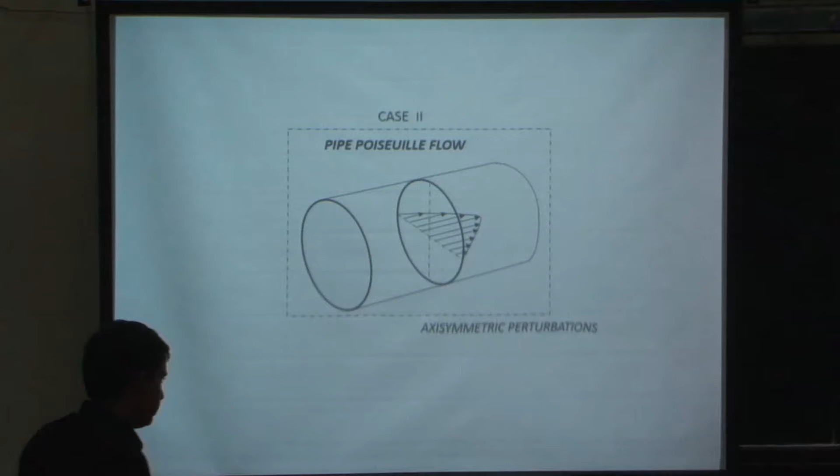It's going to show an algebraic decay, because they are going to be sheared, and will eventually be out of phase with each other.

Okay, so I'm going to go to the next level now. We'll consider pipe-Poiseuille flow. Remember, the analog of two-dimensional perturbations here is perturbations independent of the azimuthal angle. So we are going to consider axisymmetric perturbations. Here we are going to look again at fields that propagate as waves along the axial direction - instead of x, we now have z, the axial coordinate. Since they are independent of theta, the amplitudes of these waves can only be functions of r.

I've written three of those components: uz, ur, and u theta. This is the continuity equation, which means that if you know one of the velocity fields, you know the others from the continuity equation. And the analog of omega z would be the azimuthal component of the vorticity. An axisymmetric flow field only has the phi or theta component of vorticity, which here I have written in terms of u hat r. This is, we had written there that omega z was d squared minus k squared times u hat of y - this relation is the exact analog of that for cylindrical coordinates.

And so for instance, if we find omega theta to be a delta function - and we will - then u hat r can again be integrated in terms of the Green's function for this equation. This is the modified Bessel equation, so you can calculate the Green's function of that.

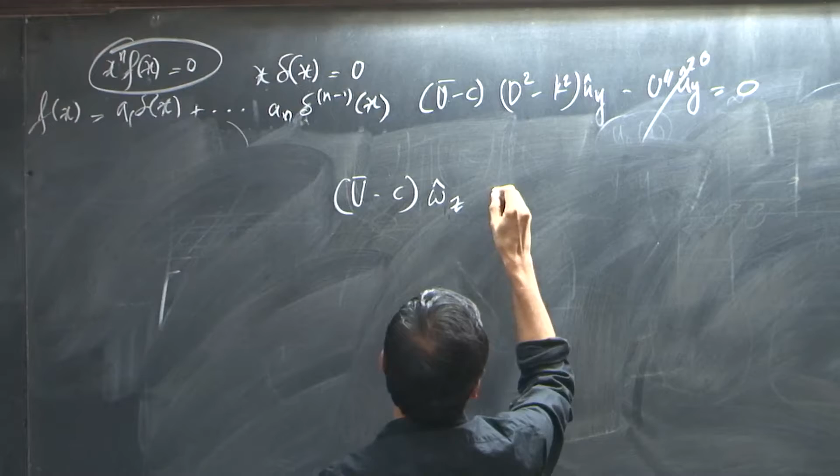So now when you do the entire analysis, let me just write what the equation was here for the 2D linear flow, Couette flow. So this was the general Rayleigh equation. For Couette flow, u double prime was 0, so omega z and u hat z satisfied the same equation. Notice that u hat z, even for a nonlinear flow, still satisfies the same equation, but omega hat z is more complicated.

So now I want you to look at this system - it is the exact analog of that, the analog of this equation for the nonlinear shearing flow. Instead of that, I now have this equation. I have y replaced by r. Okay, c is still there.

Omega hat z is replaced by omega hat theta. Now instead of u double prime, I have both u double prime and u prime appearing in this combination. And instead of u hat y, the normal velocity, I now have the radial velocity. This equation is exactly identical - instead of uz, I have u theta. So now these are the equations which govern the axisymmetric perturbations.

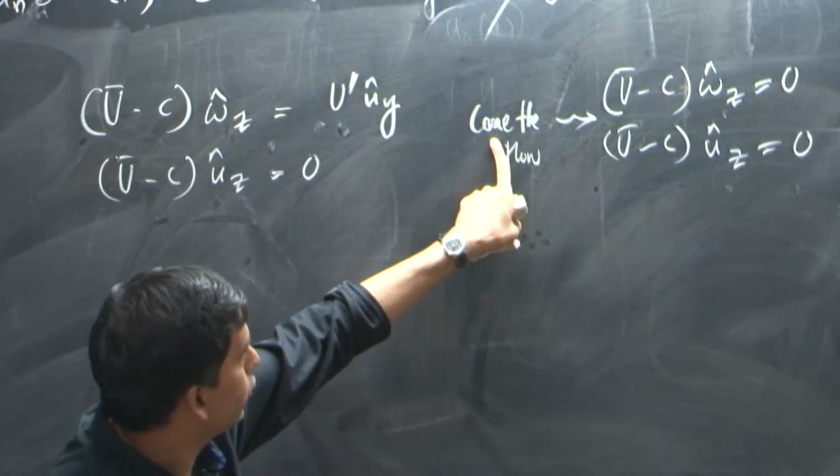And so I could look for the Couette flow analog - do these equations have a simpler limiting flow, where for Couette flow this disappears? They would disappear when u double prime minus u prime by r equals 0. Can anyone tell me what flow that is?

Okay, so it turns out surprisingly that the analog of Couette flow is in fact pipe Poiseuille flow. You would think, based on the nature of the velocity profile, that channel flow and pipe Poiseuille flow are quite similar, but in terms of behavior of inviscid perturbations, pipe Poiseuille flow is exactly like Couette flow rather than plane Poiseuille flow.

So for pipe Poiseuille flow alone, this factor would be zero, and we would get exactly the Couette-like equations, which are these. And therefore we would again obtain two modes.

So that mode will give us the delta functions in omega hat theta. And knowing omega hat theta, remember I can derive the radial velocity as a Green's function. That differential operator was the modified Bessel operator, and therefore you have a closed form expression for the Green's function. uz can be derived from the continuity equation, and u theta is identically zero. So this is an axisymmetric velocity field without any swirl.

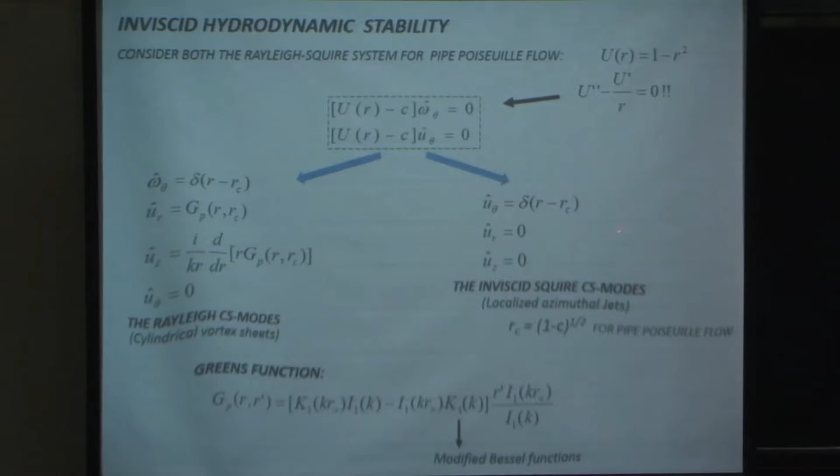Now this is a pure swirl eigenmode. This omega theta is zero, u hat theta is just a delta function like uz. So we have the exact analog of Couette flow for pipe Poiseuille flow.

So now we could go through the same exercise again and solve an initial value problem for pipe Poiseuille flow with an arbitrary velocity field for axisymmetric perturbations. Let's go through that. So that's the initial velocity field. Now instead of x, y, and z, you have r, theta, and z components.

So again, I write them as a Fourier expansion in the z coordinate. These are the Fourier amplitudes of r, theta, and z. The next step, of course, is to write that theta amplitude as an integral over delta functions, because remember, the u theta eigenfunctions are the delta eigenfunctions. So this accomplishes expressing the swirl, an arbitrary initial swirl, in terms of the elementary swirl eigenfunctions.

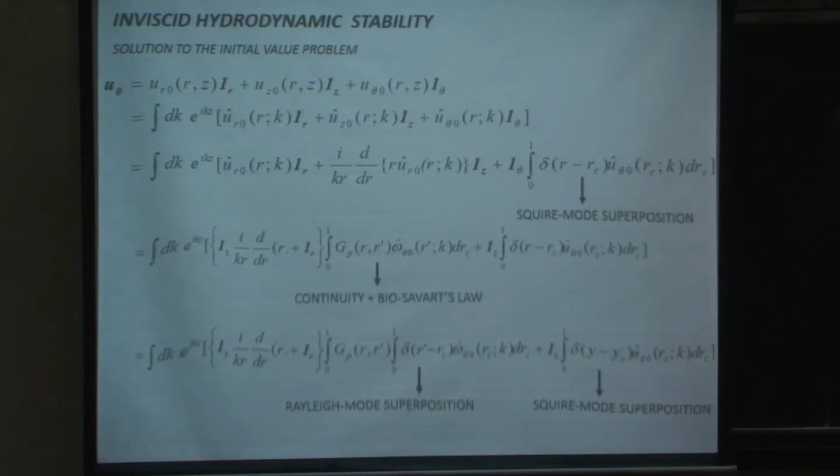And then I have these remaining. So what I do next is write ur in terms of the Green's function convoluted with the omega theta vorticity field. Just as for the plane Couette flow, I can write the omega theta vorticity field as an integral of delta functions. And this expression here is now my initial velocity field expressed as a superposition of two families of inviscid singular eigenmodes. Those are the jet eigenmodes.

So here they will be azimuthal jets, running along a cylinder, but otherwise they are exactly similar. And of course, once we have the superposition, like for plane Couette flow, the generalization to finite time is immediate. I just add the complex exponentials. So that's the initial velocity decomposed into eigenmodes. I had the complex velocity, complex exponentials.

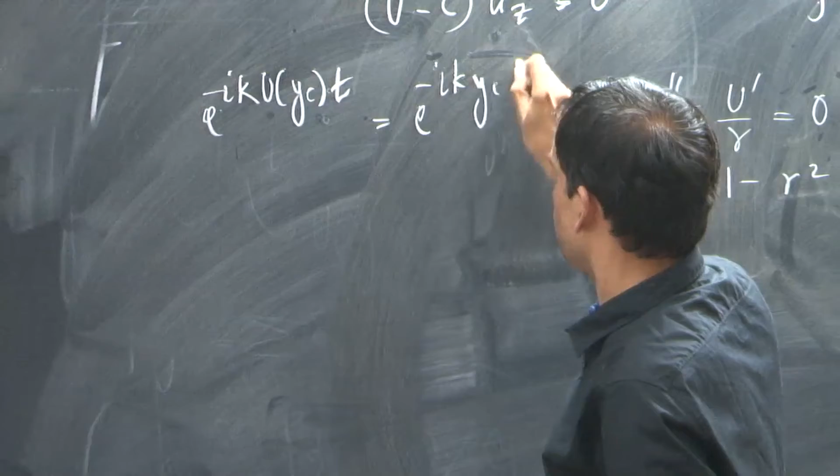Remember, the only difference is that in the parallel flow case, the exponentials' general form was this, because the vortex sheet propagated with the base state velocity at yc, and for Couette flow, u of yc was just yc. So I added these exponentials to obtain the time dependent velocity field.

Now here I have the analog as rc instead of yc, and u of rc is the pipe Poiseuille profile, and therefore I should add, which I do. You can see that those are the complex exponentials, and once I do that, I obtain the time dependent evolution of an arbitrary axisymmetric velocity field with swirl.

Well, maybe this is the last problem that we'll take up. So this is a different flow. In those cases, both were parallel flows. Now we are going to consider a base state swirling flow, which is the Rankine vortex.

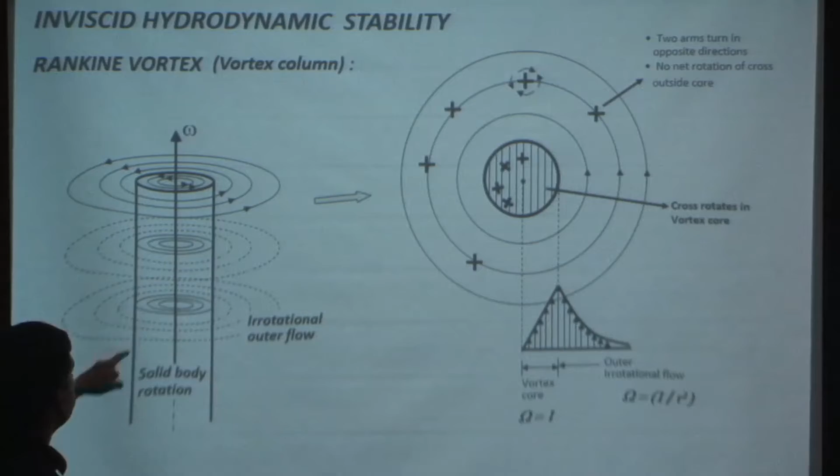So how does the Rankine vortex look like? Well, it has a cylindrical column within which fluid rotates as a solid body, and outside the flow is irrotational. So if I talk about the base state velocity field, it only has one component, along the theta direction. That component varies linearly with r within this cylinder up to the radius, and then decays like 1 by r. So if I ask for the angular velocity profile, it is of course just a constant inside that cylinder. It should decay like 1 by r squared outside.

So I could write the analog of the vorticity dynamics here. Again it's the advection and the unsteady term. The advection is along the azimuth, so it's in the theta direction. That is the inhomogeneity in the base state vorticity field, which is convected along the normal direction, and normal to the azimuth is the radial direction. I'm considering the inviscid dynamics, so I'll neglect the viscous diffusion.

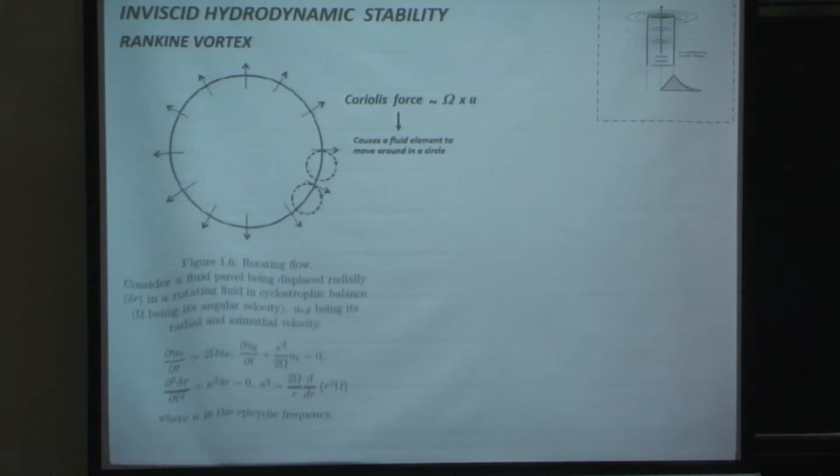Before we analyze the continuous spectrum, it's worth seeing what else is there. Unlike pipe Poiseuille flow and plane Couette flow, where the spectrum was purely continuous with no discrete modes, that's not the case with the Rankine vortex. There are discrete modes, in fact an infinite number of them, and they were found long back by Kelvin.

Let's briefly look at what the discrete modes are before we go to the continuous spectrum. Discrete modes imply oscillations of the vortex column. Now one question to ask is, why does the vortex column oscillate? The oscillation is because of the Coriolis force.

If we imagine the vortex column coming out of the page and consider a ring of fluid, suppose at a certain instant the ring is expanding radially. Then the Coriolis force, since the angular velocity points out of the plane, will cause these velocity vectors to turn around and eventually move along a circle.

So the ring first expands. As the velocity vectors turn away from the radial direction, the expansion slows down. At a certain point the velocity vectors are exactly azimuthal, the expansion stops, the velocity vectors point radially inward, and the fluid ring comes in below, oscillates again, and so on. So the Coriolis forces give a mechanism for oscillation, and these are the oscillations that are the discrete modes of the Rankine vortex.

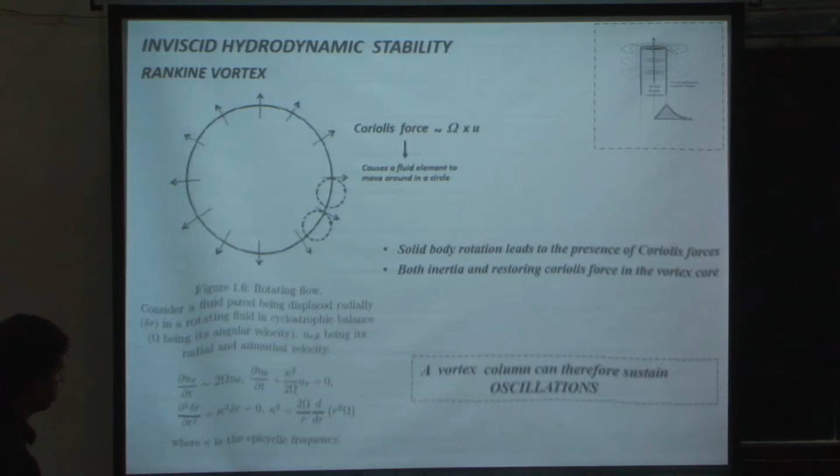So solid body rotation leads to the presence of Coriolis forces, and the balance of inertia and Coriolis force leads to oscillations. The vortex column oscillations are known as the Kelvin modes, because they were first analyzed by Lord Kelvin in the 1880s. The idea again is to look for a normal mode form.

If you are analyzing 2D modes, you would neglect variation along the axis, the z direction, and just look for azimuthally varying modes. The full 3D modes imply an azimuthal wave number, m by r, and an axial wave number, k. So you have 2D modes which don't vary along the axis, and modes in full 3D, which are the equations that Kelvin solved for the Rankine vortex.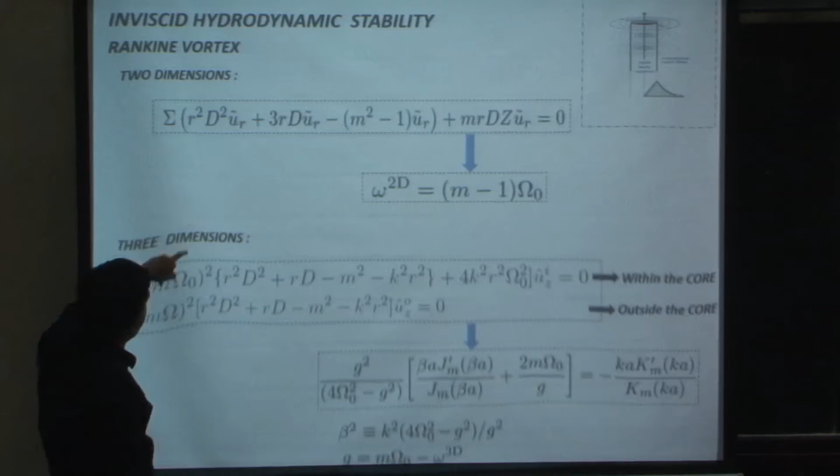If you look at the solutions, it turns out that for every m, remember for 2D modes there is only one wave number, the wave number in the azimuthal direction. It roughly tells us into how many lobes the circular column deforms, and how those lobes propagate along the azimuth. In 3D you could have both an azimuthal variation and an axial modulation of the column radius. So for 2D modes, for a given azimuthal wave number, there exists only one mode, but as soon as you go to 3D, there exists an infinite number of modes.

If you look at the discrete modes, these are the 2D modes, how they look. That is m equals 2, where you can see the circle is deformed into an ellipse, and that ellipse gradually rotates. Here it's a 3-lobed shape, so that's m equals 3, and you have one such mode for every value of m. So those are the 2D Kelvin modes, and these are the 3D Kelvin modes.

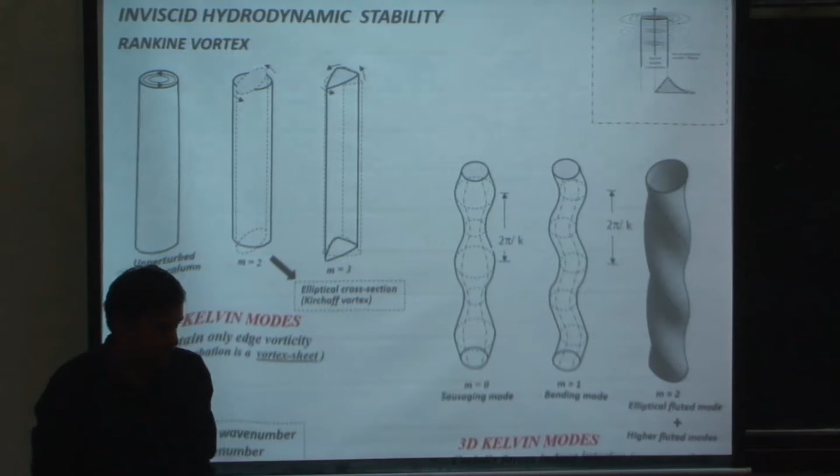When you have an axisymmetric oscillation, where the cross section all along is circular, those are the sausaging modes, where m is 0 but k is finite. You can have the bending modes for m equals 1, m equals 2, and so on. If you look at the dispersion relation for the Kelvin modes, it looks like this — what is being plotted is the modal frequency versus the axial wave number.

K equals 0 is here, so this is the 2D line, and you go to increasingly 3D modes as you move away. So I've just drawn a finite number of curves.

So m omega is the oscillation at the core angular frequency. Omega is the angular frequency in this core, and m omega would be the frequency where an m-lobed oscillation rotates with angular velocity omega.

This is plotted in this manner because there are modes that propagate faster than the core and modes that propagate slower than the core. The faster propagating modes are called the cograde modes. The slower propagating modes, for obvious reasons, are called the retrograde modes.

While I have drawn only 4 curves here and 5 curves here, there are actually an infinite number of curves. So if you take any finite value of k, at that finite value of k there are an infinite number of discrete modes, an infinite number of oscillations for any finite k, 3-dimensional oscillations.

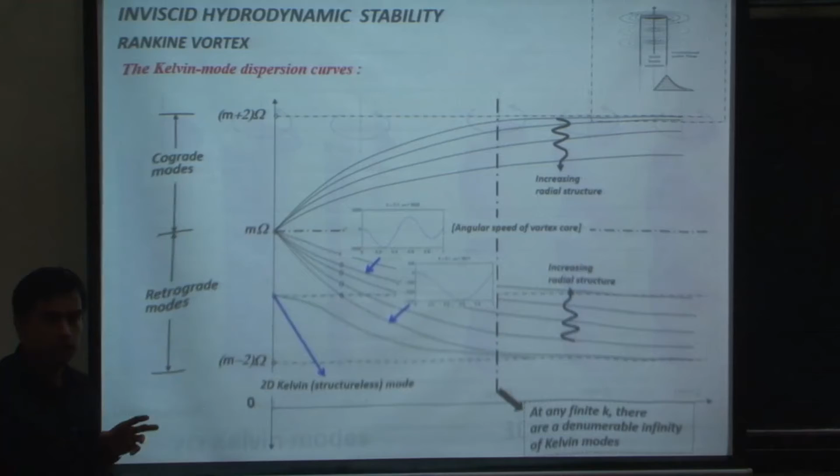But as k approaches 0, all these oscillations collapse into the core frequency, but there is one retrograde oscillation that survives and goes to a limit that is not the core frequency. That is the 2D mode. So again, an infinite number of 3-dimensional oscillations, but only one 2D oscillation.

So if you are worried about the discrete spectrum: it has one mode for k equals 0, but has an infinite number of modes for any finite k. I have plotted it for a particular m, but the picture looks the same for all non-zero values of m. The range of frequencies just goes from m minus 2 to m plus 2 times omega.

Now, of course, there is a discrete mode. In the 2D case, it's obvious that there is one mode, and you certainly can't have one mode act as a basis.

So why do we need a continuous spectrum in this case? Well, we need a continuous spectrum because the Kelvin modes physically denote oscillations of the vortex column. They only contain vorticity within the core or at the edge of the core. They don't have vorticity outside the core.

Now a relevant question that's attracted a lot of attention recently is: how does a vortex column respond to turbulence outside its core? Turbulence is of course a patch of vorticity outside the core, and since that vorticity is outside the core, you cannot represent it in terms of Kelvin modes, which only have vorticity inside the core. So you need something more, and that something more is precisely the continuous spectrum.

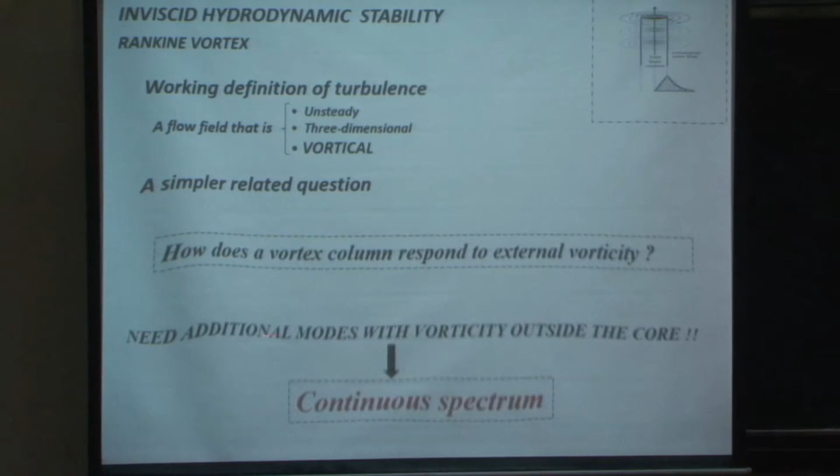So despite there being an infinite number of oscillations, you still need the continuous spectrum because those discrete modes only contain vorticity within the core. You need additional modes with vorticity outside the core, and it is the continuous spectrum modes that have vorticity outside the core.

So I just drew these continuous spectrum and discrete modes. These are the Kelvin modes. Remember that this is a 2D oscillation with m equals 2, elliptical core rotating. That is m equals 3.

I have drawn them like this because if you ask for the perturbation vorticity associated with the Kelvin discrete mode, then the vorticity is located right at the edge of the column. So the vorticity associated with the 2D discrete mode is a vortex sheet that surrounds the column. Since it's only located at the edge of the column, there is no vorticity outside, and you cannot represent the vorticity outside.

Then you ask, what do the continuous spectrum modes look like? Well, they look pretty much like the Kelvin mode as far as that vortex sheet is concerned, but it turns out that there is a second vortex sheet in the outer region. So these are the discrete spectrum modes in 2D with just a single vortex sheet around the edge of the core. These are the continuous spectrum modes with a pair of vortex sheets.

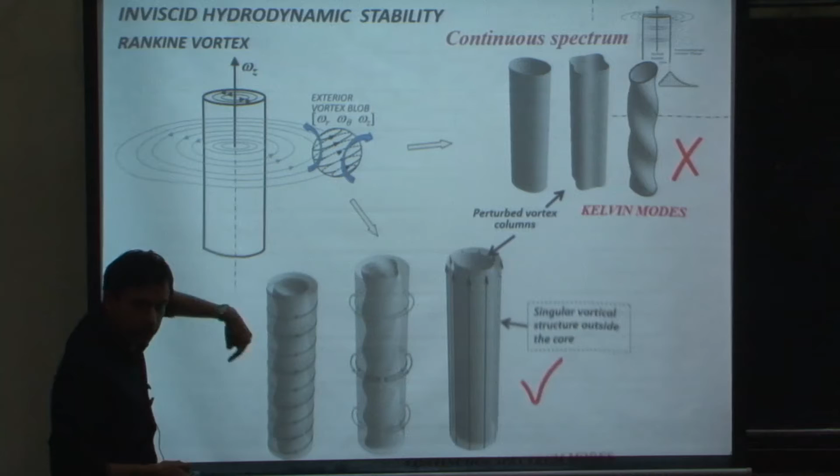That inner vortex sheet is just like the original Kelvin mode vortex sheet, but the outer vortex sheet is like the vortex sheet we encountered in plane Couette and Poiseuille flow. There, the vortex sheet in plane Couette flow was parallel and propagated with the flow, which was parallel. In this case, the vortex sheet is cylindrical and the flow is azimuthal, so the cylinder rotates about its axis. Both these vortex sheets rotate with a common angular frequency, and that is the 2D continuous spectrum mode.

This is the governing Rayleigh equation for the Rankine vortex in 2 dimensions, the analog of what we wrote down earlier. Remember, uy is replaced by ur now. I'm only considering 2D modes since I have only one wave number, m, the azimuthal wave number. For discrete wave modes, I equate the differential operator directly to 0. For the continuous spectrum mode, that differential operator is instead a delta function.

Instead of delta of u minus c, I have delta of r minus rf, or rc. So this is the cylindrical vortex sheet structure, and I get the amplitude of the vortex sheet here. This amplitude denotes the strength of that second vortex sheet. If I normalize the vortex sheet at the core to be unity, then I have a certain amplitude of the second vortex sheet denoted by that expression.

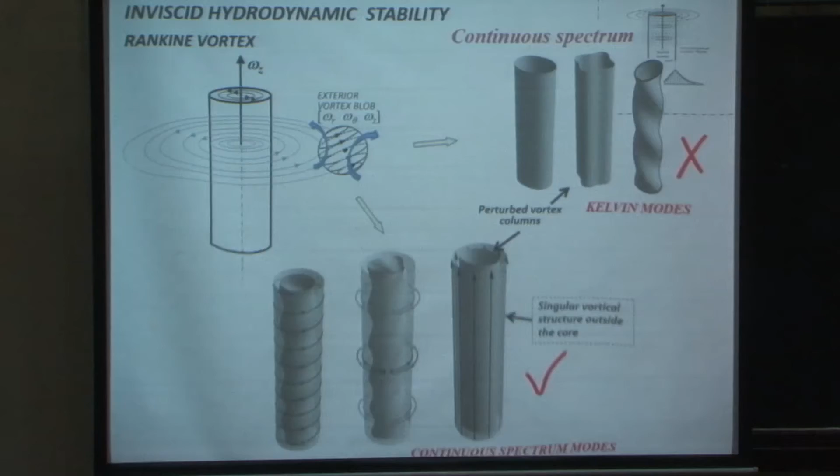The nice thing is that unlike plane Couette flow and Poiseuille flow, this amplitude isn't always non-zero. It equals 0 at a particular value of RF, which corresponds exactly to the frequency of the Kelvin mode. So you can derive the continuous spectrum modes, and in terms of the amplitude of that vortex sheet, the location at which the amplitude equals 0 automatically gives you the discrete mode.

So the last thing we'll do is construct an initial condition in terms of these modes. Remember, I'm going to construct a 2D initial condition. Since it's a 2D field, we have only the axial vorticity, so I'll represent an arbitrary initial axial vorticity field in terms of the 2D Kelvin modes and the continuous spectrum modes. The only difficulty is that I have to account for the discrete Kelvin mode.

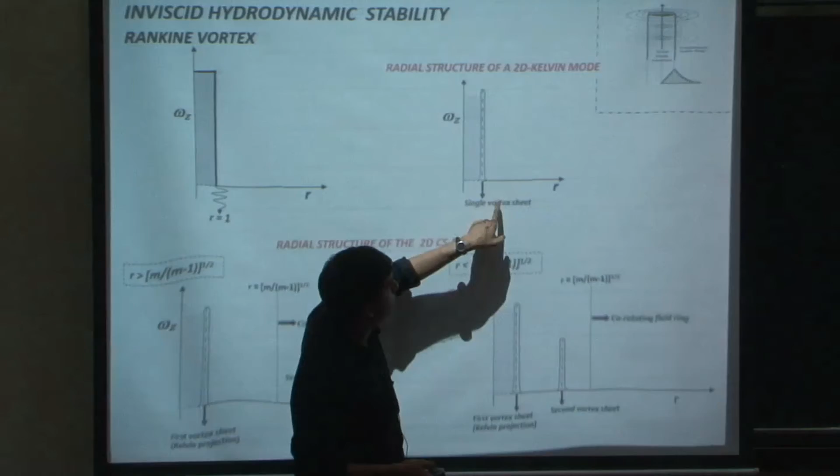Here is the structure of the Kelvin mode, just a schematic. This is a base state profile with a cylindrical column of constant vorticity, and irrotational flow outside. So vorticity is a step function of the radial coordinate. That is the Kelvin mode eigenfunction, where I have only a vortex sheet at the edge of the core. Remember, there's the edge of the core and there's the axis of the column. Right at the edge of the core, the Kelvin mode has a sharply peaked vorticity eigenfunction.

I just told you that the continuous spectrum eigenfunctions have two vortex sheets: one already at the edge of the core, and a second one outside the core. But the sign of the amplitude of that second one depends on where I am radially, and there's a particular location where the vortex sheet goes to 0, which corresponds to the Kelvin mode. So: the single vortex sheet discrete mode, and the twin vortex sheet continuous spectrum modes, all in 2 dimensions.

So this is a schematic of the initial value problem. I have a vortex column with some patch of axial vorticity that I'm going to call turbulence. I want to see how I can represent this vorticity in terms of the continuous spectrum modes.

So what I do first is take this axial vorticity patch and decompose it into delta functions, the same thing I did for Couette flow. If that axial vorticity patch is f of r, I write it as f of r prime times delta of r minus r prime, dr prime. That is my vortex sheet located at r prime, equivalent to constructing that axial vorticity as a superposition of second vortex sheets. So now let's say I've found the superposition of second vortex sheets that make up that patch.

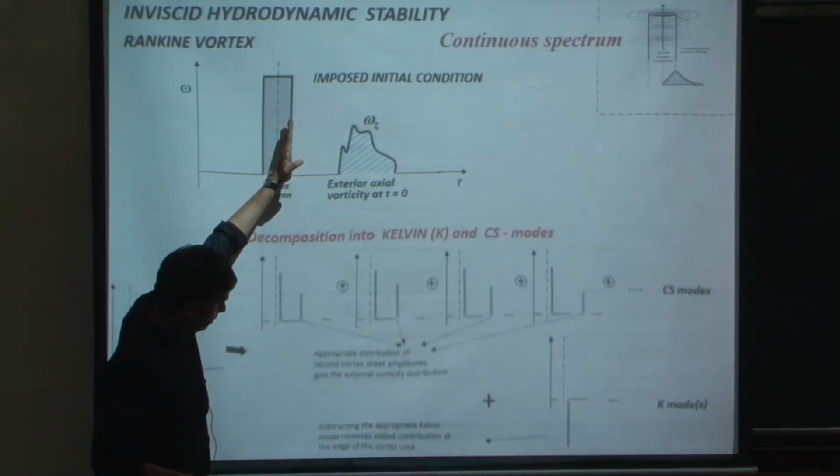So I first add all the continuous spectrum modes to represent this, get an additional contribution here, but then add the discrete mode with the opposite sign at the edge of the core and cancel out that contribution and get my initial value problem.

So here too, although I have not written down the math, it's more complicated, you can represent physically an arbitrary axial vorticity field in terms of the continuous spectrum and the single discrete mode.

Now, I think it's a good point to end here, because I don't have enough time, but I can tell you that you can do the same thing in 3 dimensions. Just like pipe flow and plane Couette flow, there exist 2 continuous spectrum families for the Rankine vortex. When you include both continuous spectrum families, you can generate a 3-dimensional vorticity field as a superposition of the 2 continuous spectrum families and the infinite number of discrete modes. You need the infinite number of discrete modes still. And this is Rankine vortex in 3 dimensions.

You can also go to Couette flow in 3 dimensions and Poiseuille flow in 3 dimensions, but those become more complicated, although it can be done. So I hope that these elementary problems gave you an idea of what the continuous spectrum eigenfunctions look like and how you can combine them to represent an arbitrary velocity field, even when there are no normal or discrete mode eigenfunctions. Thank you.

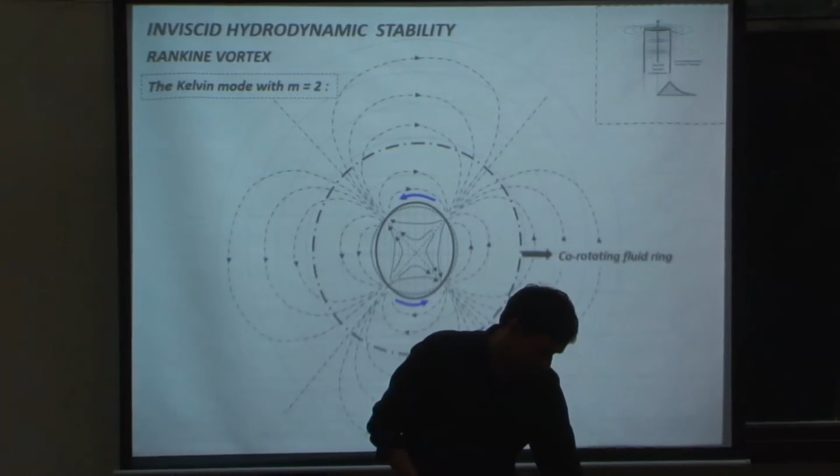The continuous spectrum modes themselves have streak-like structures, though they are singular.

The inviscid continuous spectrum modes, not the viscous continuous spectrum modes. So the inviscid continuous spectrum modes, I spoke about jets, right? There will be streamwise jets, which can be superposed to construct a streamwise streak. So in that sense, unlike the discrete modes, the continuous spectrum modes have a natural span-wise structure that emerges. I spoke only about two-dimensional perturbations, but when you go to 3 dimensions, the jets turn and then eventually point in the streamwise direction. So you can construct both streamwise counter-rotating vortices and streamwise jets from these modes.

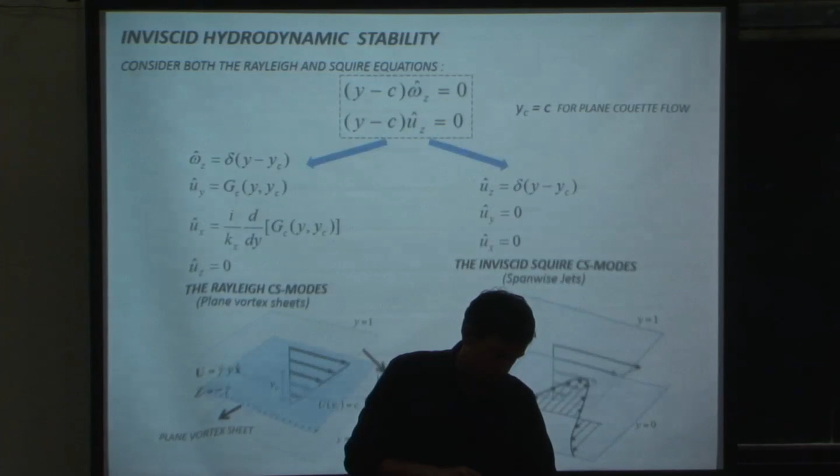So did I answer your question? Did you? Yeah.

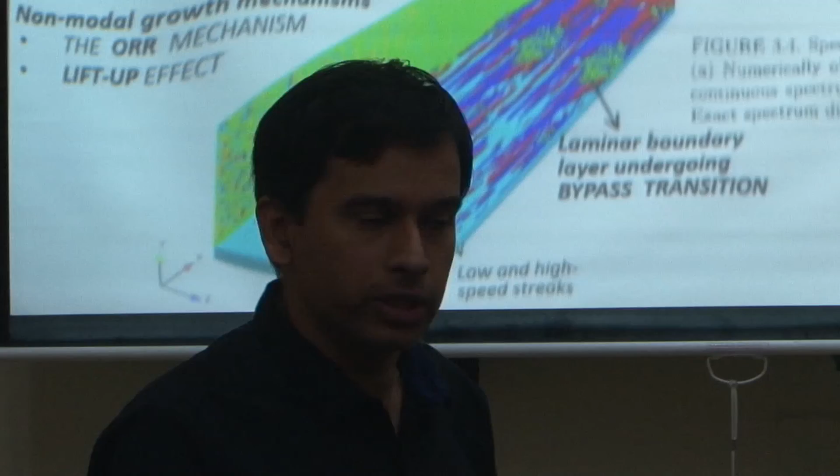So once you showed four, even before that, I think four discrete—yeah, that, well, it was intended as a general description. So if you have a velocity field with two inflection points, there will be a mode corresponding, a pair of modes corresponding to each inflection point. Yeah, so I didn't literally show a picture with two inflection points. Yeah, that velocity profile will only have two modes.